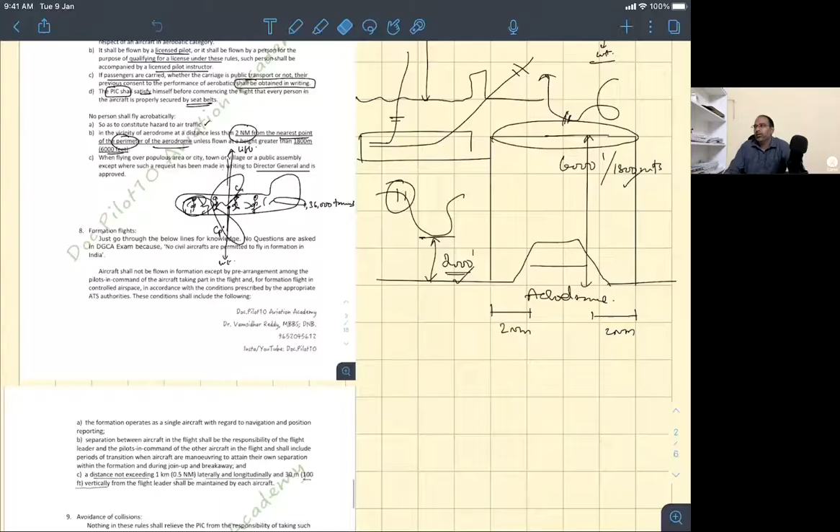So yesterday we have seen the rules and regulations to fly aerobatically. Today we will see the rest of the rules. Here, formation flights. What are formation flights?

Formation flights are like if you fly in US, if someone flew in US among you, you would know you can rent out aircraft, two or three friends, and fly like this, together, very close nearby, making fun of each other, talking on radio. Sometimes you see this in air shows, they do formation flights, like five or six aircraft will be doing like this.

I mean, they go together. For example, you and your friend want to go from one place to other place in US, you can do a formation flight. I have a friend who is very close to me, so he always sends me videos when they do formation flights in US.

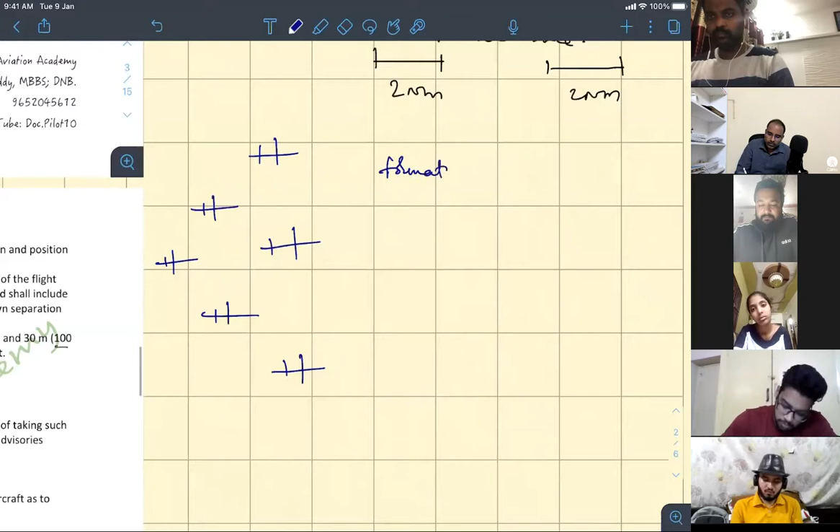Formation flights are not permitted in India. No civil or general aircraft can fly as a formation in India. Of course, military aircrafts do fly. Even though it is not permitted in India, nobody will ask you any questions because it is not permitted. In airlines, you won't have any questions on this. In DGCA, you won't have any questions on this. But it is interesting, na?

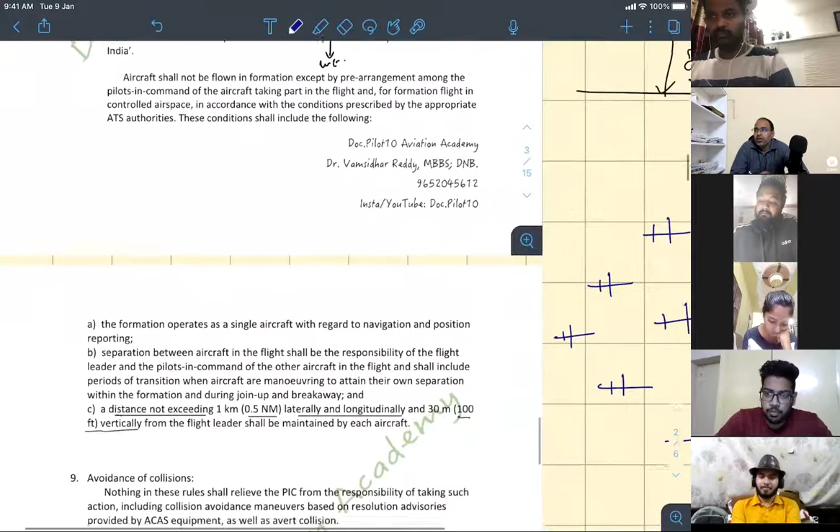If some of you are flying in US, you have to know this. If aircrafts are flying in formation, they can only do so by prior coordination. Even before they start their flight, I cannot just say on radio, shall we do a formation flight to so and so place? No, I cannot do it. Formation flights can only be done by pre-arrangement, meaning you have to talk to the other pilots before you start, and this has to be notified to the appropriate ATS authority, if you have a tower. If you're flying over large places, you should file a proper flight plan. And if you're forming a formation like this, the ATC will consider this as a single flight.

And who is the pilot in command? There are multiple pilots in command, so there will always be a leader. This will be the only guy who will talk to the ATC. They will fly as if it is one aircraft. Joining and leaving of aircrafts is all pre-planned. And who is responsible for the separation? Only the leader, of course, and he should be able to coordinate with all the pilots in command.

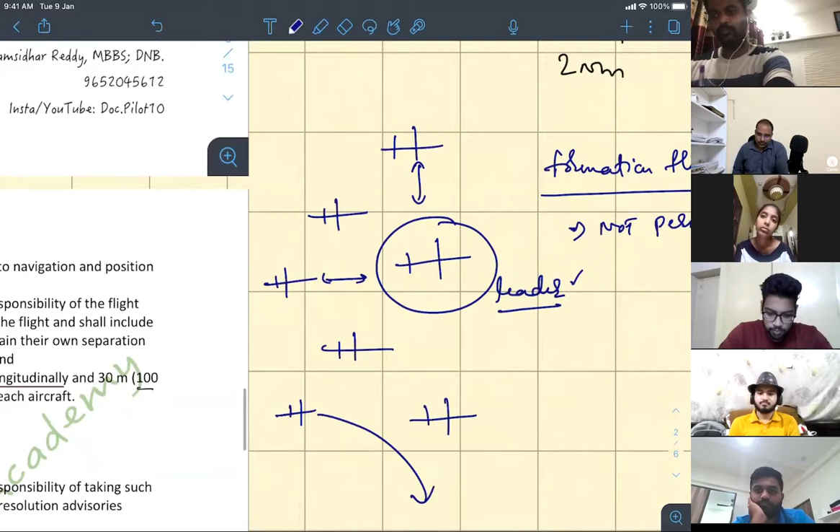How many of you have seen formation flights like this in YouTube videos? Many of you, but nobody would have seen formation flights like this unless you're flying for Air Force or Red Bull, because the distance between the two formation flights should not exceed 0.5 nautical miles, or about 1 kilometer, since ICAO gives rules in both metric units and nautical miles. So it is their rule that a formation flight should be as close as less than 0.5 nautical miles, and if flying side by side, as close as 100 feet.

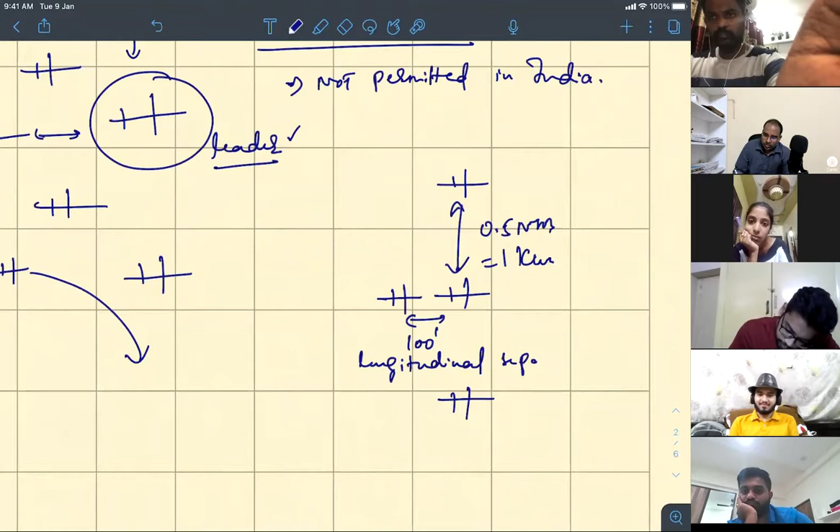This is called longitudinal separation. This is called lateral separation.

If in my life I ever visit US or Canada, I'll definitely do this. Now, for example, one guy went mad doing all this stuff. So the leader can order in the interest of safety for everyone to break up. So nothing of these rules will stop the leader when it comes to safety. Just for fun sake, nobody will ask you questions on this in exam.

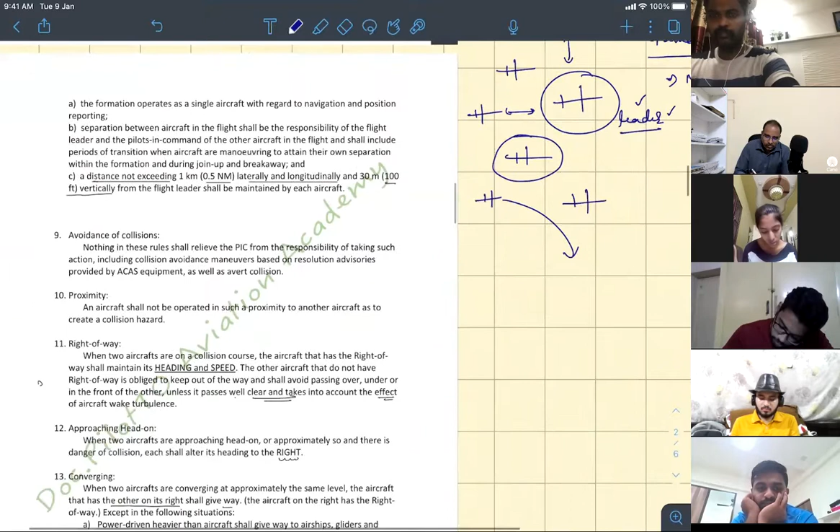For example, Amogh kept on with his career. He went and completed his CPL, then joined as an instructor in a flying club, part time. So when he is an instructor in a flying club, I go to Amog and ask him, I want to hire an aircraft and fly with you. He will ask me how many hours I have. I would say around 200, because by the time Amog comes out, I would have completed 300-400, but I would say 250 to be safe. And Amog would say, you know how many hours I have? 1,000 hours, now he is working as an instructor. Now he will increase his hours. And one or two times I would have told Amog in class what he did, so he kept that in mind.

And for example, in a sector I'm flying like this, and Amogh is here.

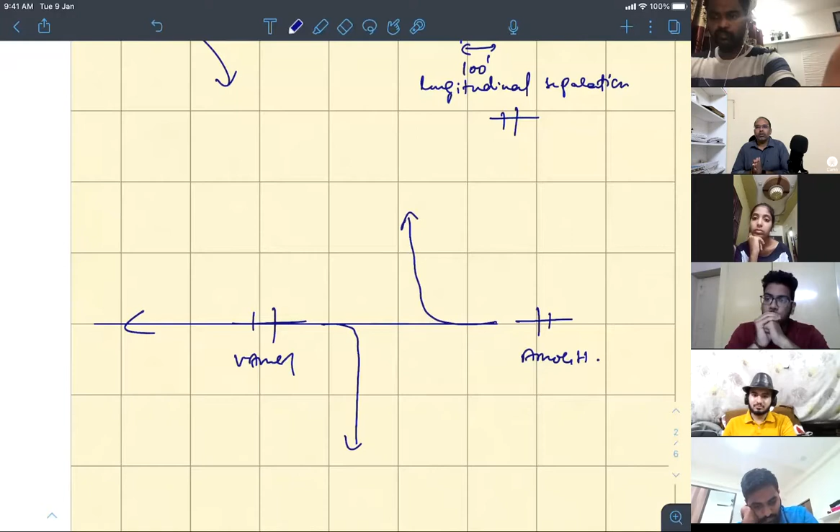I'm just saying, in cases where two aircraft are head on in a collision course, what is the best thing to do? Sir, I would turn right. Correct. Both aircraft should turn to their right. Always remember, immediately turn right when you are on a collision course with another aircraft head on. This is how you avoid collision when coming head on to each other. Both aircraft will turn right.

This is called getting close to each other, or cases of proximity. In cases of proximity, you turn right.

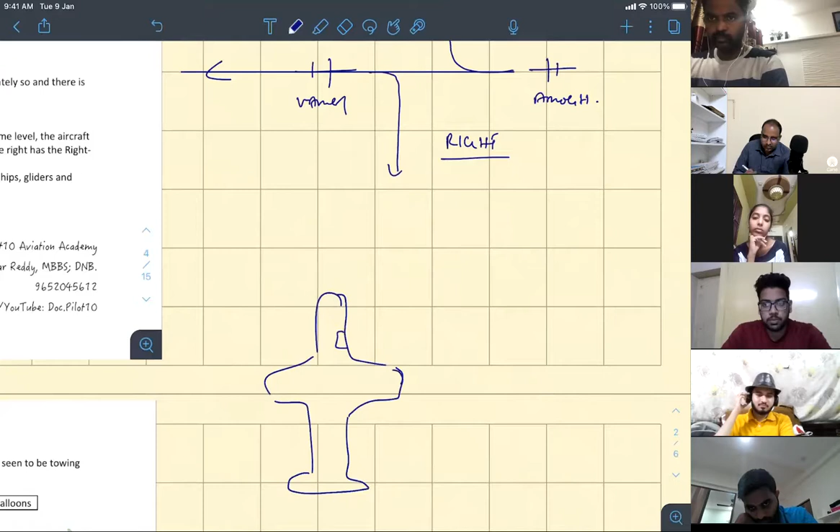If you're flying a small aircraft, or imagine you're sitting in an airliner with a seat on the right side of the plane. Now you see an aircraft, it looks very small and far away. You think, this aircraft is at a relative bearing of around 65 degrees from my nose. Relative bearing is measured from the nose in a clockwise direction, since you came for navigation. So you keep thinking, when I'm on an aircraft, I also keep thinking this.

After 5 minutes, it's still on the 65 bearing, but it started looking bigger. After some more time, still on 65 bearing, but bigger again. So when this happens, the bearing of the aircraft does not change, but it slowly starts getting bigger. That means at some point the tracks are going to cross each other. Am I clear? You are on a collision course.

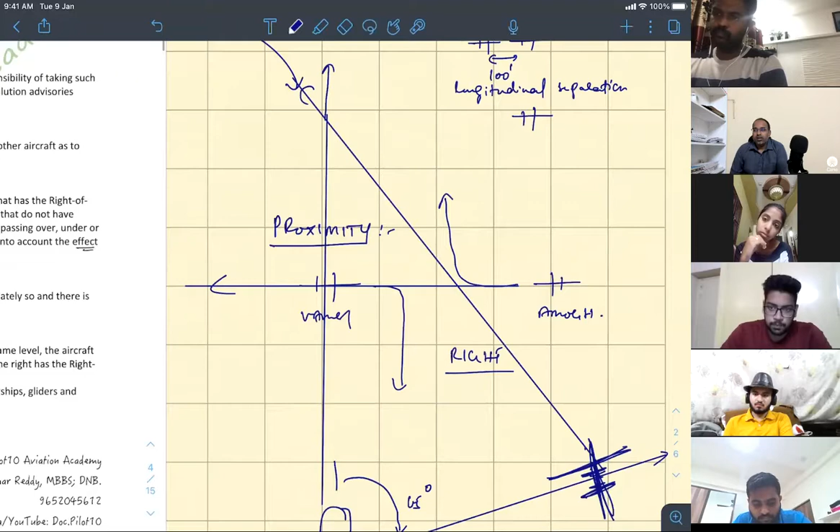In this case, how can you manage? Ideas please. Slow down the speed. There is something called right of way. Whichever aircraft is on the right, correct? Which aircraft is on the right? This one, correct? This one will have the right of way, correct?

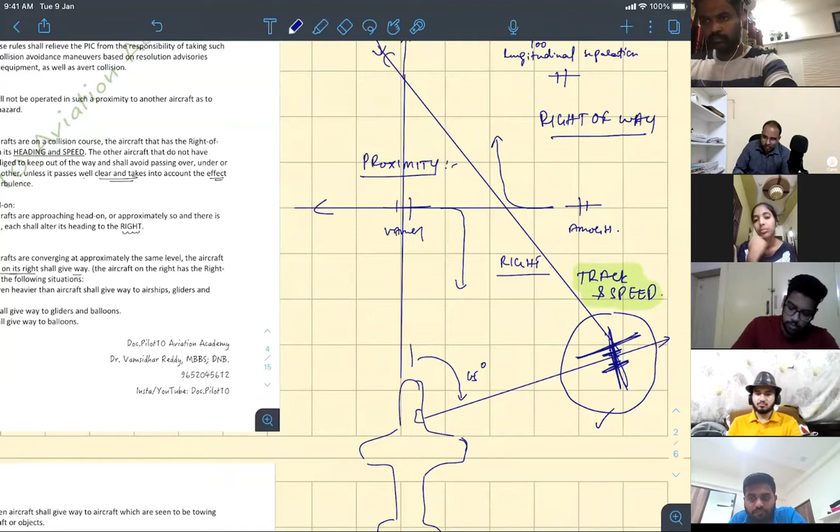It will maintain its track, it will maintain its speed. They will ask, what will it maintain? It will maintain its track and speed, it can go normal. The other aircraft, which doesn't have the right of way, on the left side in this collision course, will do anything - it will slow down, change levels, turn right like this. It will do anything to avoid the collision. This is called the right of way.

Am I clear? I'll read it out: when two aircraft are on a collision course, the aircraft that has the right of way shall maintain its heading and speed, very clear - it will maintain its track, the heading and speed. The other aircraft that do not have the right of way shall keep out of the way and shall avoid passing very close to the aircraft.

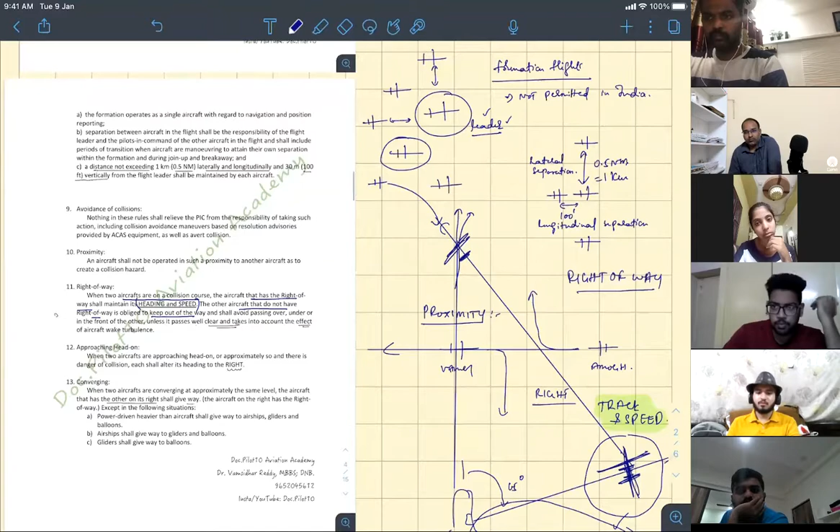If this aircraft is here, and I just say I'll overfly it, it will be a very scary situation. I don't know what your aircraft altimeter settings are, I don't know your aircraft capabilities, how accurate can you fly? First of all, I don't trust the other pilot. So you cannot go very close, over, under, or in front. You should maintain a well clear distance, and you should also consider the effect of wake turbulence.

You cannot say, 'I will go fast, I'll be here by the time he reaches here,' because there is wake turbulence - you have created vortices in your path, that also should be considered. Am I clear? Now, which aircraft has the right of way?

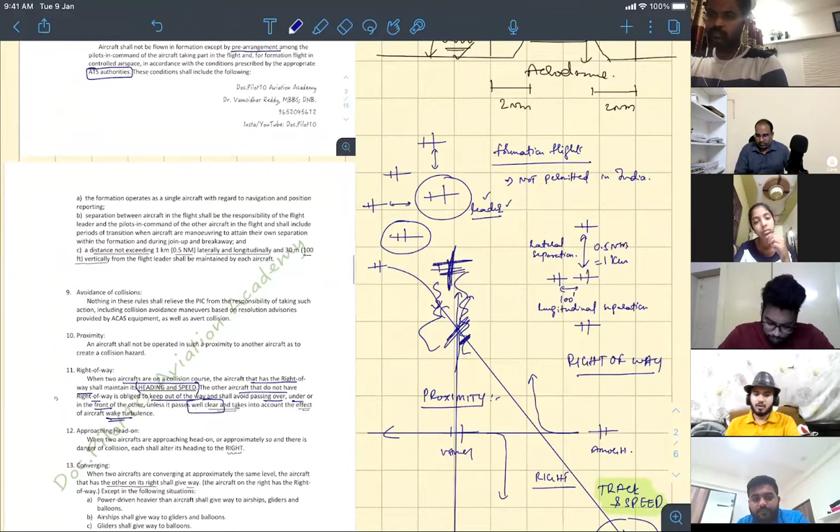The aircraft on the right side has the right of way. This is the right side, aircraft on the right. Am I clear? Darwin and Azhar, are you following? Yes, that's fine. Next.

Here, when approaching head on, you will turn to the right. Both aircraft will alter to the right. Is that understood? Yes.

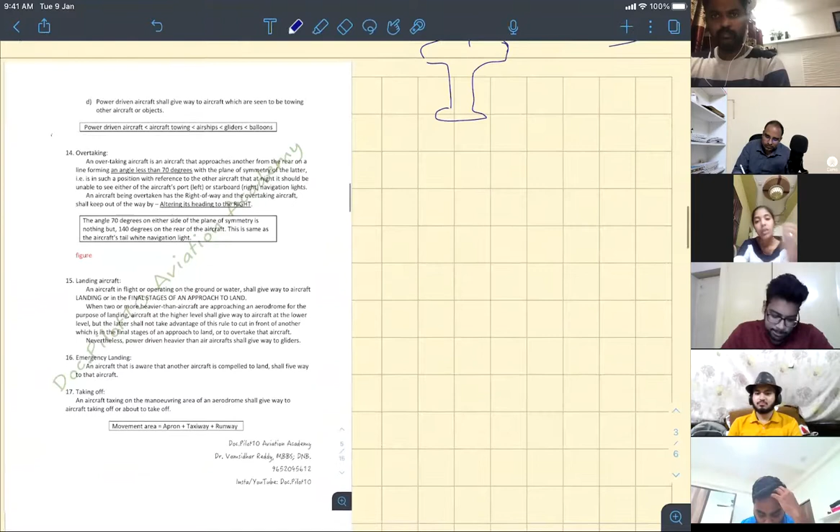For example, think you are the same aircraft. Let's say, who is flying? Manthan is flying. Okay, now I am flying this aircraft, Vamshi is flying this one. But today I am flying a glider.

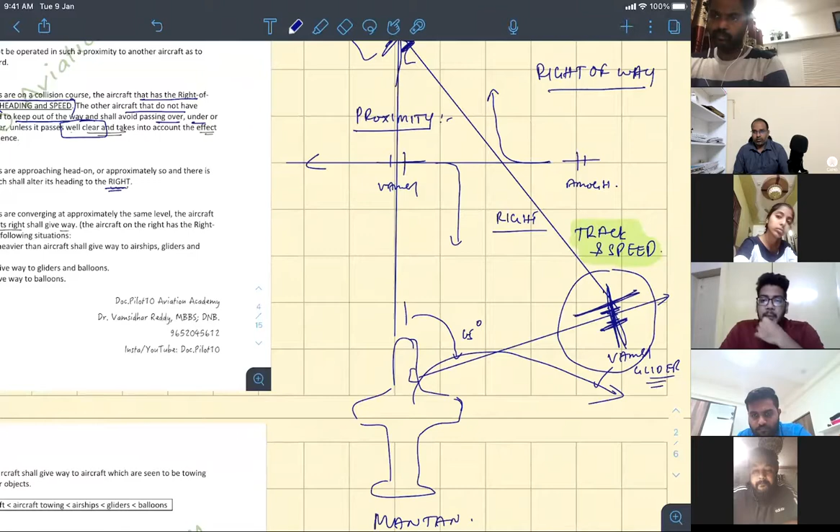Now, because the glider is on the right, it will maintain its heading and speed. Correct, Manthan will go away. Clear? Because whichever aircraft is on the right will have right of way.

Now imagine the next scenario, Vamshi is flying a glider. I am on the left, and Manthan is flying a powered aircraft, heavier than aircraft. Heavier than aircraft in the sense it has an engine and it will produce thrust. Due to the lift and thrust, the aircraft is flying. Correct. So this is Manthan.

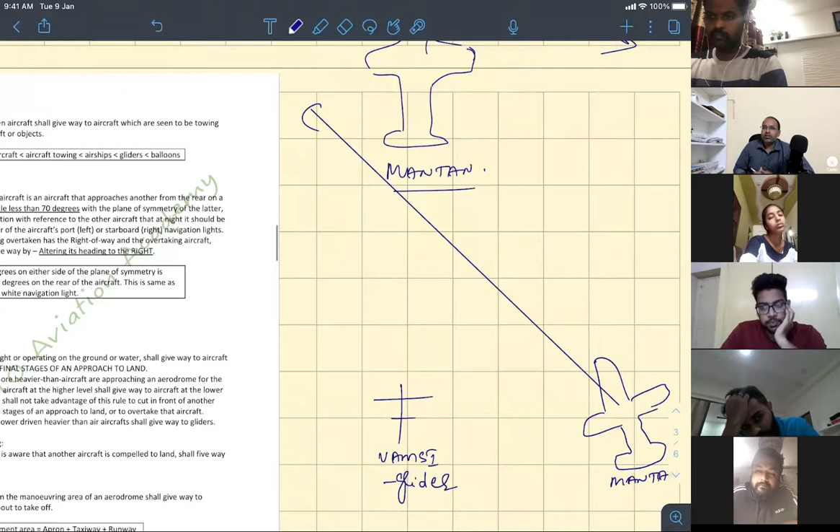Now, if Manthan says, 'Here, Vamshi, see, I have the right of way. You do whatever you want to, but I will not move.' Will I be comfortable? Yeah, I am flying a glider, I don't have an engine. See, I am maybe going to land here, or maybe my airfield is here. So if I make unnecessary turns, I may not reach the airfield. I may crash into a nearby field or building, because I don't have an engine, I cannot produce lift.

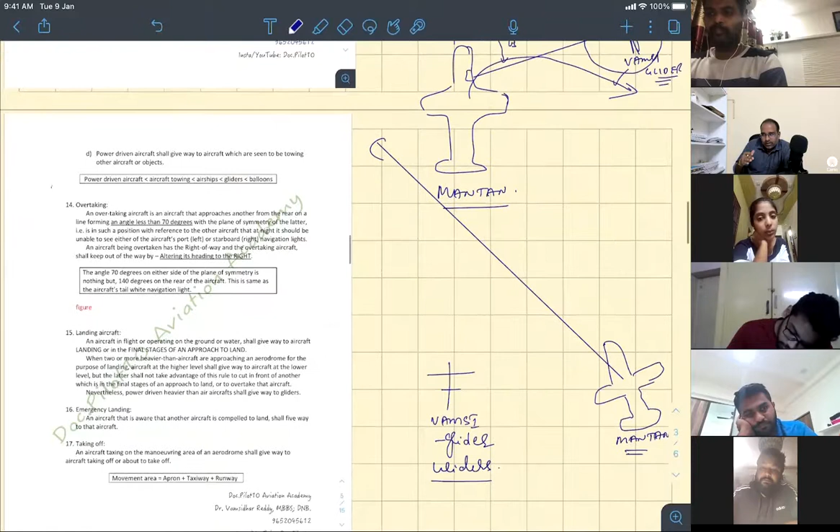So in this case, even if you are on the right and you have the right of way, you have to give way to gliders. Am I clear? That means if an aircraft has capabilities less than you, you have to give its way. Capabilities less than you does not mean a Cessna and a 737, I'm saying a glider and an aircraft.

The hierarchy is like this: power driven aircraft, in all cases, without minding the right of way, will give way to an aircraft which is towing. Is towing permitted in India? No. A towing aircraft still has engines, so it will give way to airships. What is an airship? It will be a big thing with a small fan, filled with helium, so it has some capability to generate lift and move forward.

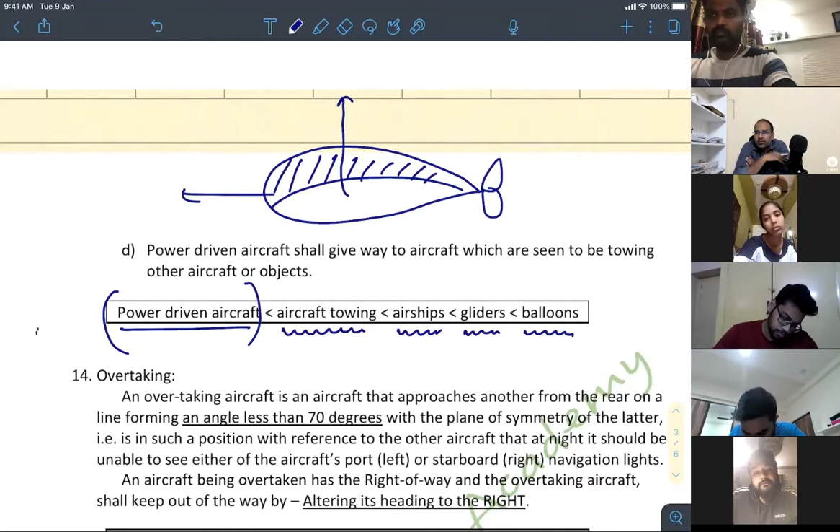Next, it will give way to gliders. Gliders will give way to balloons. Balloons are the least mobile things, it is difficult to move a balloon. So this is the hierarchy: power driven aircraft gives way to aircraft towing, this towing aircraft gives way to airships, airships give way to gliders, gliders give way to balloons. That means power driven aircraft will give way to everyone - all the towing aircraft, airships, gliders, balloons, etc. Am I making sense, Darwin? Clear everything? Yes sir, clear.

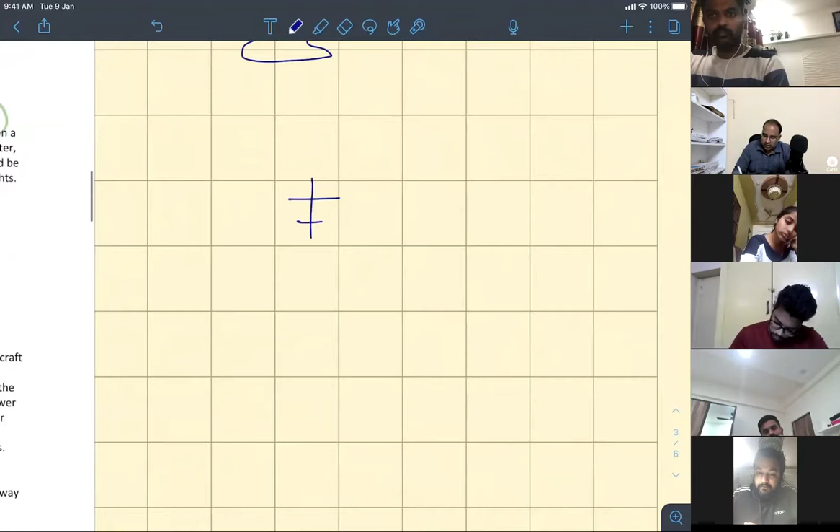See, if I am here, around at 20 nautical miles, this is Vamshi, let's say this is Amogh. Amogh is flying like this and said, 'Hey Dr. Vamshi, take a look on your right.' What is it? 'Oh, I'm overtaking you.' This is not overtaking, Amogh. This is not overtaking, that is cheating. Understood?

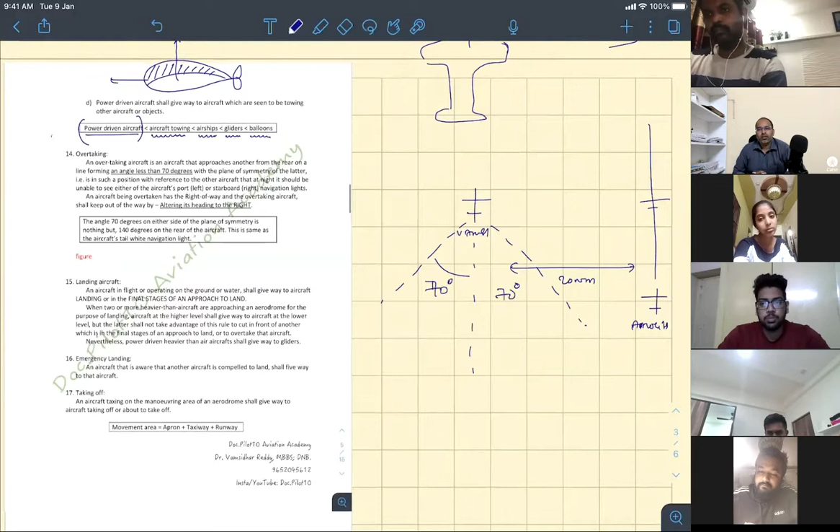Are you clear? Overtaking has a definition. Okay, then I will teach you on the radio. Amogh, by definition, overtaking means you have to be behind me within 70 degrees on each side. Clear? Am I clear? This is by definition overtaking.

Okay, then next day Amogh will come again. 'Oh, Dr. Vamshi, I am on your tail, I am overtaking you.' Okay, I will file an incident report on you, Amogh, if you do that. You know why? The aircraft which is ahead will have the right of way.

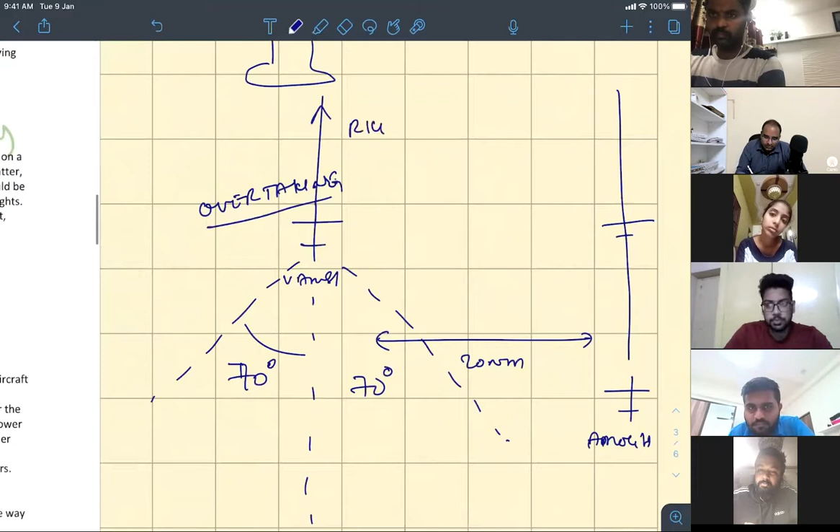The aircraft which is behind, that means 70 degrees on either side, like on the other side behind the fore-aft axis of the aircraft, it will keep out of the way of the aircraft flying ahead. At any cost, it will keep its way out. Am I clear?

See, how many of you know about lights on the aircraft? Any idea? The lights which you use to navigate are called navigation lights.

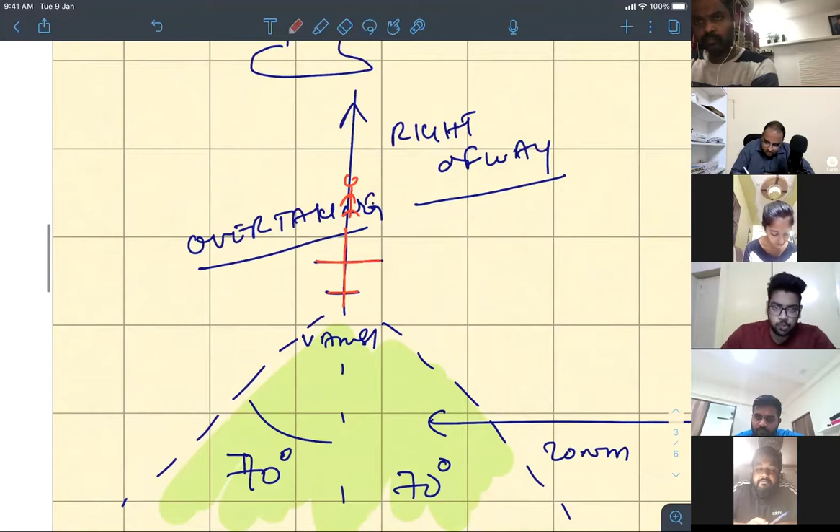So right navigation light is green. Left has how many letters? 4 letters, correct? That's why it is red. If you ever confuse, right side green or left side green, more number of letters - green has more letters, so it is on the right. Red has less letters, so it is on the left.

Clear? Now, these are steady lights. Navigation lights are always on, that means they don't blink. They are steady lights. So if they ask what is the right navigation light, it is steady green. Left navigation light is steady red.

Now, the tail light is white light. Steady white light. Am I clear? Tail light is steady white light. If you see an aircraft flying at night, you should recognize which way it is flying. Depending on which lights you see, you can tell which way it is flying.

These lights cover the entire 360 degrees around the aircraft. So white light is covering how much? 70 plus 70, so 140 degrees.

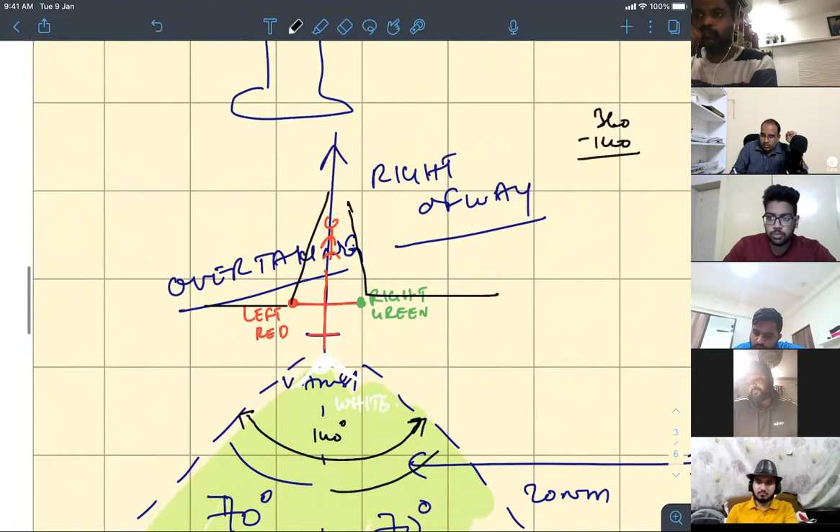The right and left, the red and green lights will cover the rest of it. How much is it? 360 minus 140 would be 220 degrees. 220, na? So this would be 110 degrees, and this would be another 110 degrees.

Yeah, Azhar, be on mute. New guys, see, whenever you want to talk, you have to press the space bar and talk. Understood? Correct.

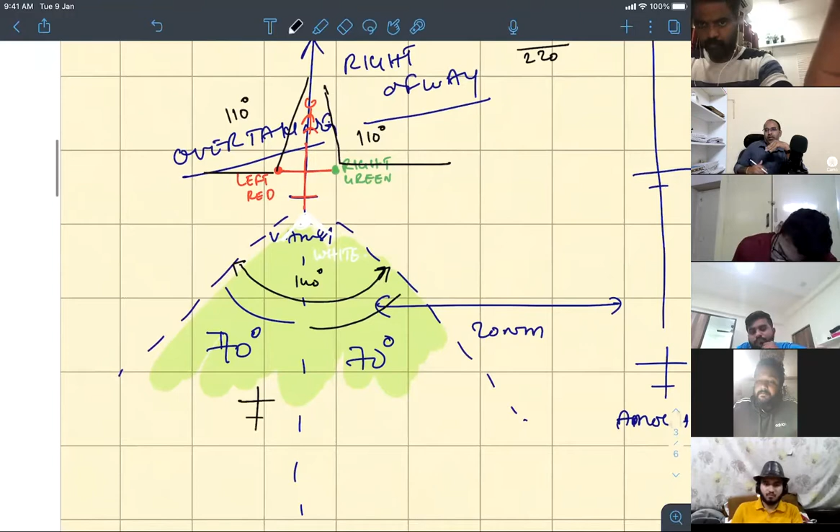Is this clear? Covering the 360 degrees. That means if you are behind an aircraft, you only see the white light. For example, if you are here, you can see the white light and also the red light. If you are here, you can see the green light, also the white light to some extent. If you are here, going like this, you can see only the red light. So the navigation lights give the relative path of the aircraft.

So if you see only white light, that means there is an aircraft ahead of you. You should not overtake it if you're flying at the same level. The aircraft ahead of you will maintain its heading and track. You should alter your heading to the right to avoid collision. You should not overtake or undertake closely; you should take all this into account.

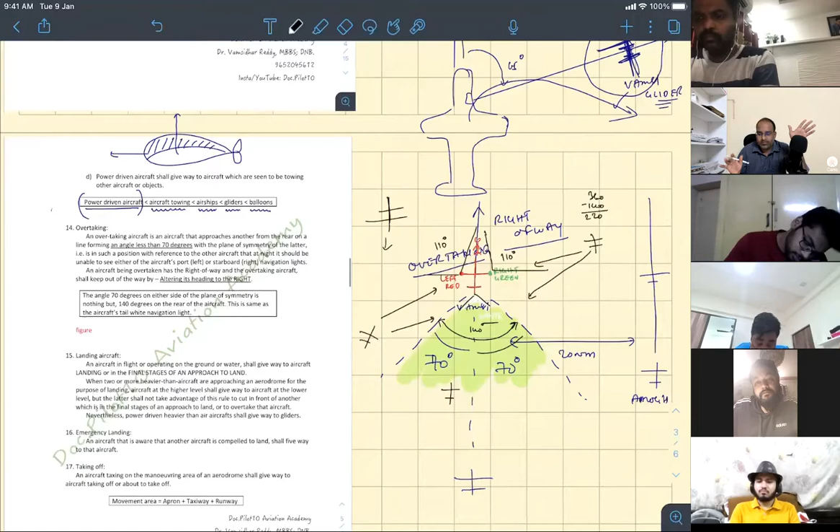Overtaking means an aircraft that approaches another aircraft from the rear on a line forming an angle of less than 70 degrees with the plane of symmetry of the aircraft, that means the fore-aft axis. Plane of symmetry is like dividing the aircraft into two parts, correct? That is the longitudinal axis.

Here, the aircraft being overtaken has the right of way. If you overtake, come down, we'll see - I'll file a complaint. Understood? Never do it.

The overtaking aircraft shall keep out of the way by altering its heading to the right. So in any case, if something is coming to collide, or if there is an obstacle, always turn right. Am I clear?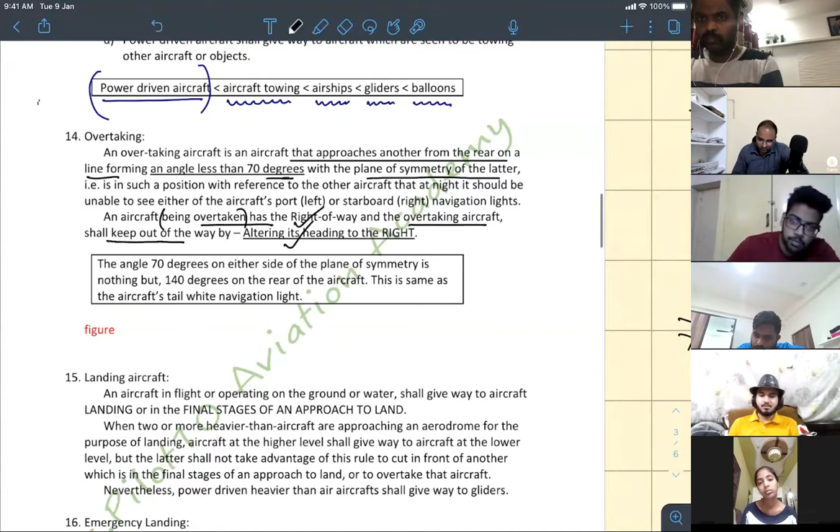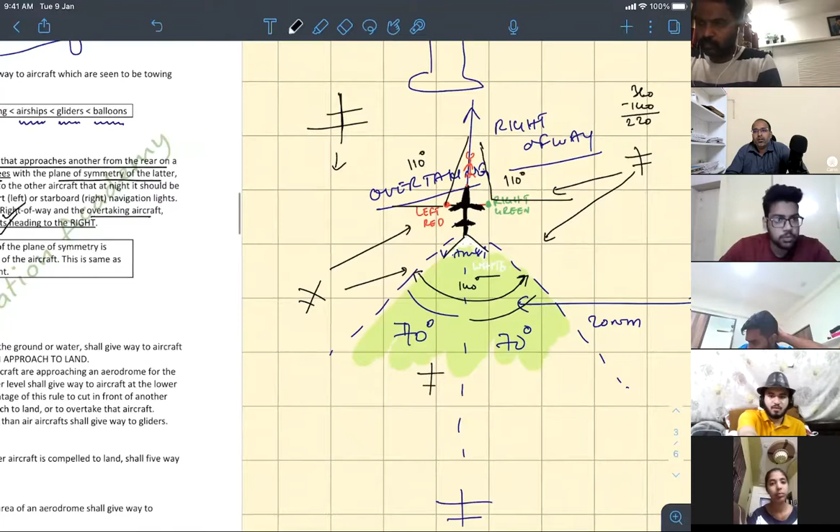Here in this figure, you write this figure, you draw this figure. Let me draw the aircraft a bit thick. Is this clear? Super clear, everyone? No.

Sir, when there is an aircraft to the right side, at a relative bearing of 90 degrees, the right of way is with that aircraft, right? Do I have to do anything to avoid collision with that aircraft? I can even descend, ascend, or turn anywhere, right? How are you on collision course if this is Amogh?

Yeah, this is the aircraft, this dot. Which heading is it flying? This is relative bearing 90 degrees, as you said. Which heading is it flying? Give me the heading. Around let's say 12 o'clock, flying parallel, no? But I won't be knowing, right? If in case it is slightly tilted toward the left, at some point it might join - see, if it is slightly tilted like this, it will remain on your 90 degrees relative bearing. One second, you became mute. I'll come back.

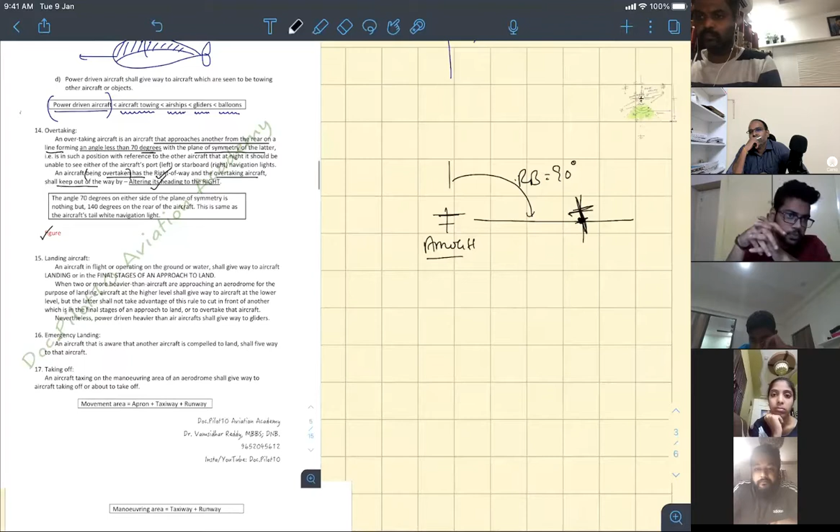See, if this aircraft is on a relative bearing of 90, and let's say its course is 350 degrees, and you're maintaining north, 0 degrees.

This aircraft initially will look small to you. You may not notice, but as you come here, it would also have come here. That means both are maintaining almost the same speed, but it will look bigger. And here, if you're here, it is closer and will look bigger. Still, it is on your relative bearing of 90 degrees.

Understood? So that means if the speed and the tracks are matching so that you are on a collision course, the relative bearing will not change, but the aircraft starts becoming bigger. This is what I was trying to explain.

So then what action should we take? Here, this guy has the right of way. You being on the left, you should have the give-way course, correct? But usually, if we are in a collision with the upcoming aircraft, we have to turn right, right? But here we can't do that. No, you can do that.

I'll show you. See, you're here, this aircraft is here. Let's say between you and the aircraft the distance is 2 nautical miles. Generally, this is how the aircraft will come close, not so close. Now, see, you will start turning right. You will slow down and start turning right, or maybe you will do a circle.

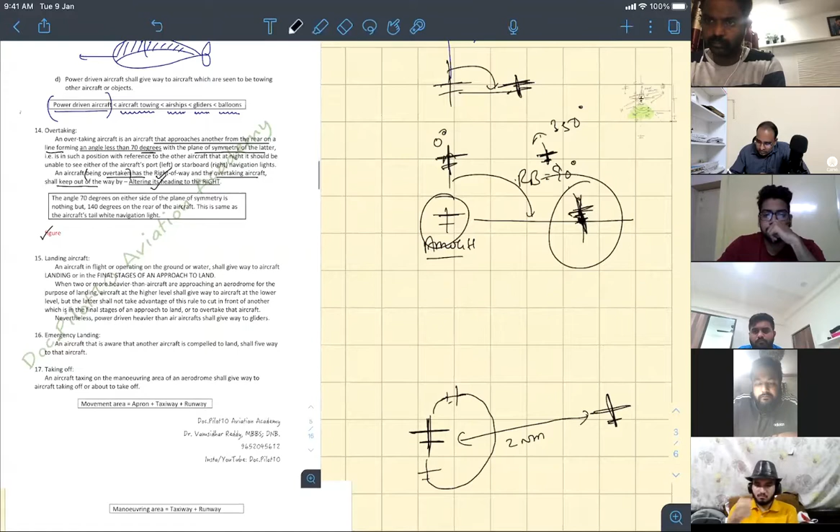The aircraft will be here. By the time you are back to your original position, correct, the aircraft will be here. You take your right.

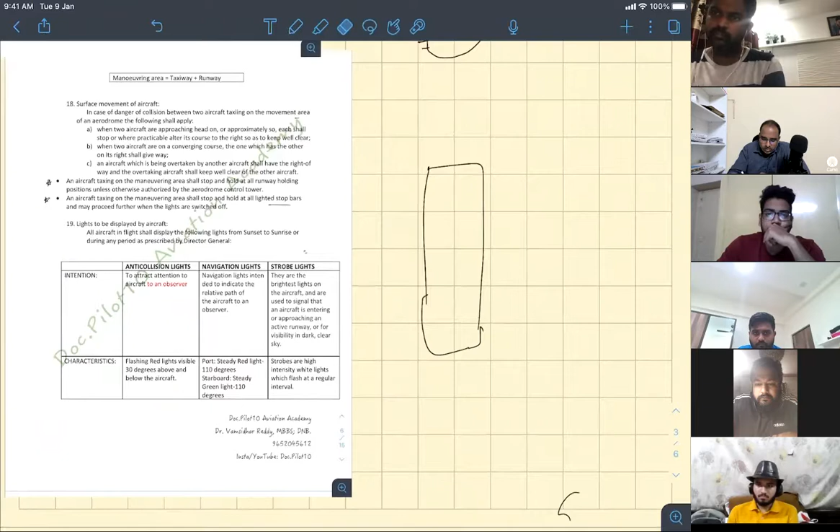For example, we do circuit patterns in flying schools. For example, if this is your runway, circuit patterns means you take off. All circuit patterns are towards left unless otherwise mentioned. You fly upwind, crosswind, downwind, base leg, finals, and complete the landing.

So for example, you're flying like this and one more aircraft is closer to you. It is also in the circuit pattern. Here in circuit pattern, at least 8 aircraft can fly, if all the people are very much experienced.

Now, imagine the aircraft ahead of you is a Tecnam. Now it will put its flaps down at this position. Initial flaps will be down. Generally here, final flaps will be down.

Now it is cruising at, let's say, 75 knots. Now being a Cessna here, you are cruising, you did not put your flaps down, you are cruising at 85 knots. That means you are closing on this aircraft, correct? So you will say, for example, if this is Hyderabad Tower, Victor Tango Alpha Bravo Charlie, doing a circle to avoid traffic, correct? You will do a right side circle. So by the time you do your circle, this Tecnam will be here and the gap is maintained.

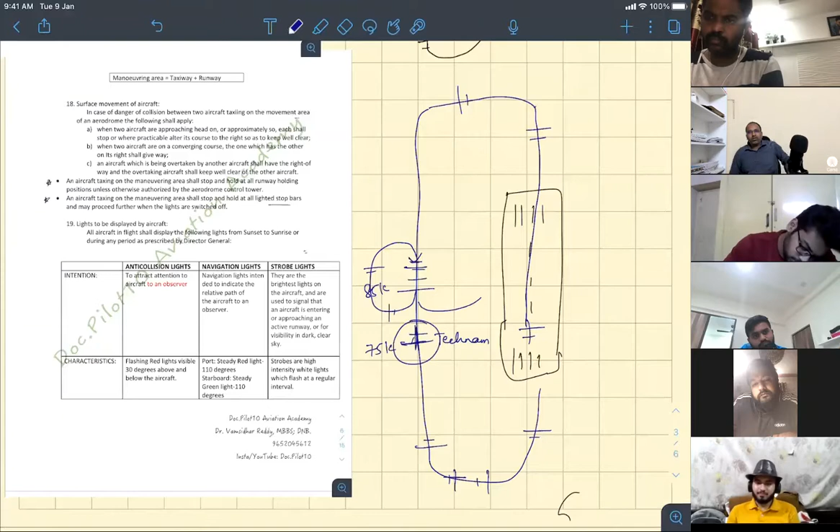All turns should be to the left, sorry, to do a left turn. In cases of collision, everything should be to the right, because that is the general rule and everybody will be following it.

Correct? For example, you and me are on a collision course. So I by default will turn right. If you turn to your left, that means here, Amogh, I will kill you. Don't turn. Turn to your right and get away. Clear? Am I clear? Is this doubt clear, everyone?

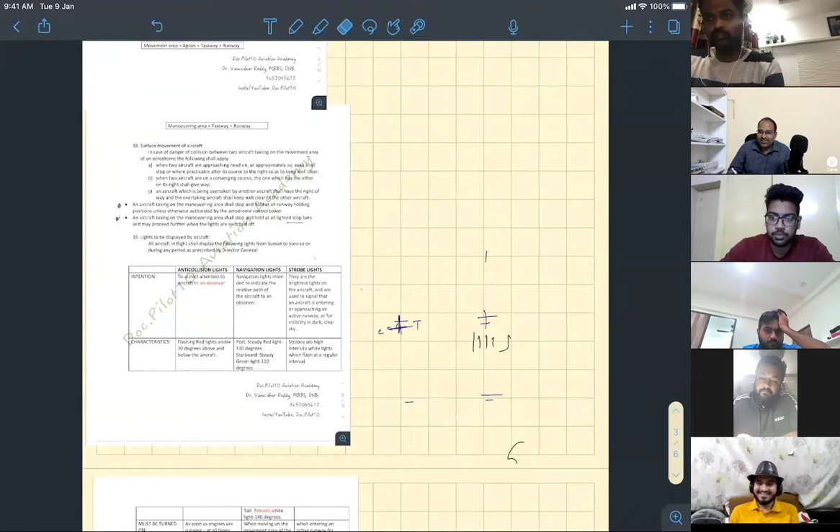Anyway, you will need a clear understanding of this because these rules are there forever, so someday it might come to application in real life. Daily it should come to application, since you will be flying in a traffic pattern in your flying schools.

That is why I'm a bit slow on this chapter. Next chapter I'll be fast.

See, for example, this is your runway. If an aircraft is coming to land on this runway, now for example, this is on finals, that means its flaps are out. Landing flaps, landing gear is out, landing lights on, so it is configured to land.

Its power is almost idle. If it's a Cessna, it is already idle, just gliding. If it's a Tecnam, almost idle, but we still keep some power, so generally for Tecnam it is the procedure. As soon as you come very close, you cut the power, not at a height. For Cessna, I think you cut the power at, let's say, 100, 200 feet. Azhar, correct? Yes, sir.

Now, for example, one aircraft is holding short. Let's say this is Ramakant.

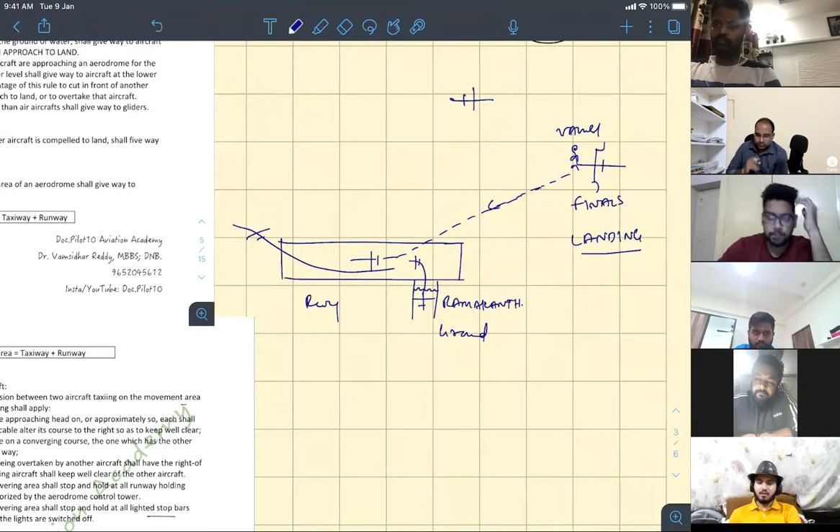See, there are two aircrafts. One Vamshi is flying, another aircraft Lucky is flying. Both are in landing configuration, both are coming to land. Let's say I am flying a Cessna today, Lucky is flying a 737, Boeing 737. Now which one has the right of way?

Generally, which is closer to the runway will have the right of way. Now let's say Lucky and I are at same distance from the runway. But Lucky is flying a 737 and it is on a bit higher level than my level. Now should Lucky land first or should I land first?

Stupid. I will land first because I am closer to the ground, na? So the closer you are to the ground, the more danger it is. So the one which is closer to the ground will come and land. This may go for a go around, do a circuit pattern and then again come back for landing. Now a guy like Amogh, who is very intelligent, will say he is behind me but he is below me, so I will come like this and land, na?

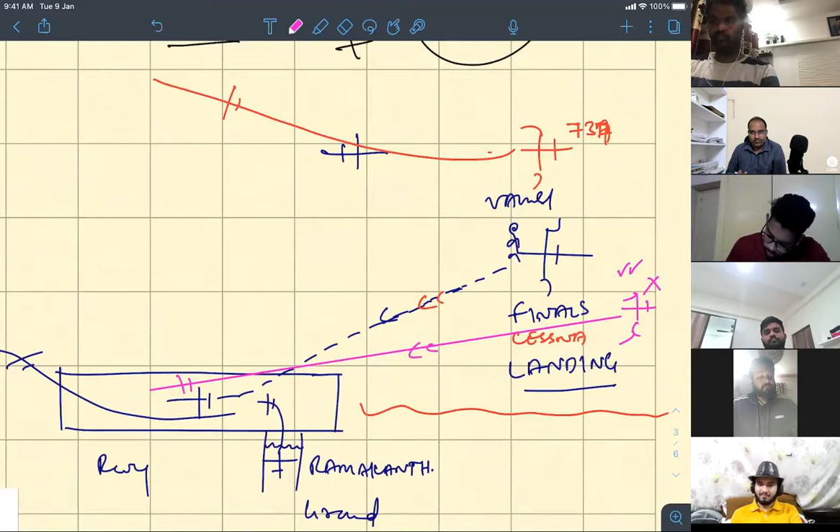So, an aircraft in flight or operating on the ground shall give way to aircraft in landing or in final stages of approach to land. Clear?

Next. When two or more heavier than air aircraft, that means normal aircrafts, not glider, not balloons, not airships, are approaching an aerodrome for the purpose of landing, the higher level aircraft shall give way to the lower level. But the lower level aircraft, like Amogh, will not take the advantage of this rule to cut in front of the other which is in the final stages of approach to land. You should not overtake my aircraft, Amogh.

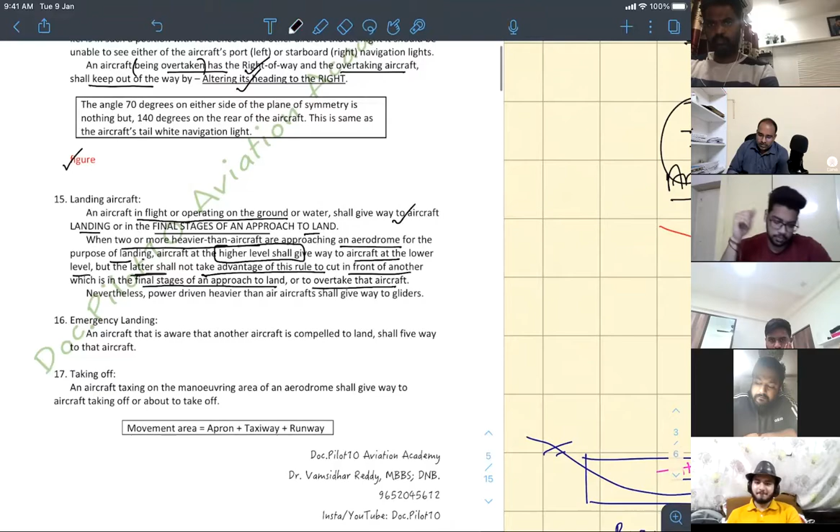Am I clear? For example, one more rule. If let's say Lucky is flying a glider today, I am flying a Cessna. I can always divert, go around, I have power, correct? But Lucky, she's coming closer to ground, she will not have more power to climb up. So I should definitely give my way to gliders, even though it is at a higher level.

Does it make sense? So the same hierarchy, power driven aircraft, towing, airships, gliders, balloons will apply here also in cases of landing also.

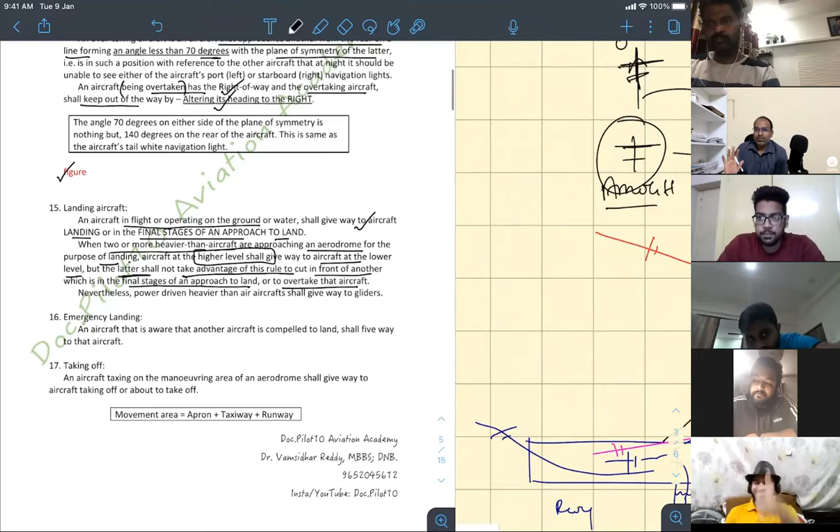Oh, now see, you are taking the advantage, you are undercutting my this thing, na? One will say notes and one will say slides. I'll give both, okay fine. I'm okay. But don't do in real life, don't do while flying. Sure, sir.

Now, for example, an aircraft declared Mayday. Even if you are just touching down, open full power, don't occupy the runway, just glide over the runway. Once your speed reaches, for example, you're flying a Cessna 70 knots or 60 knots, put your flaps up, nose up, climb off. So always give way to the aircraft which has declared a Mayday or which is in an urgent situation. Am I clear? Okay, next.

Same scenario. This is the runway, this is the taxiway. I am here, I want to take off in this direction. The winds are favoring this direction.

I am flying a Cessna 152. This is Ramakanth's aircraft, Ramakanth is flying a private jet. Here, this is so powerful that it will just need this part of runway and it can take off. Private jets are very powerful, correct? Jet engines, only 10 passengers they carry.

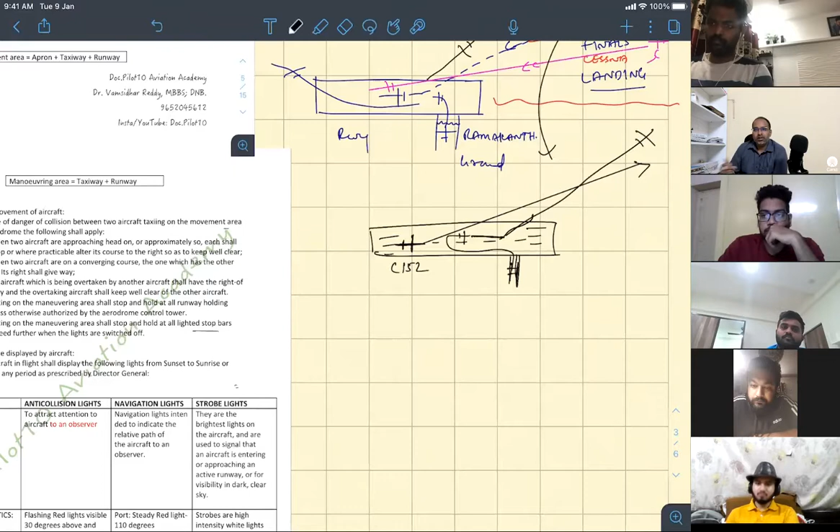Payload is less, correct. Now, once I started rolling, even though Ramakanth is comfortable doing this before time, if I reach here for my takeoff, can Ramakanth do it? No, correct. So always an aircraft which is taxiing or holding short of a runway will give way to the aircraft which is taking off. Am I clear? So never do it.

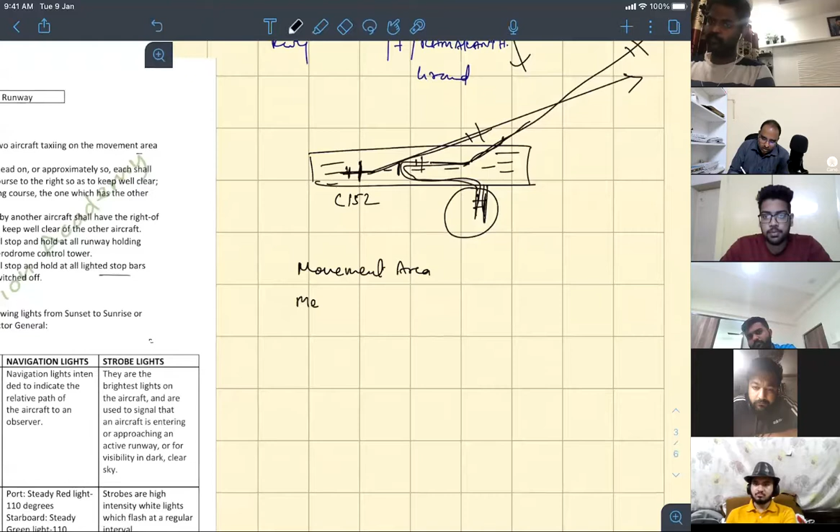Here, what is the difference between Ramakanth... you don't answer. Movement area, maneuvering area. Spelling might be wrong, please ignore. What is the difference between movement area and maneuvering area of an aerodrome?

Azhar, try. Sir, maneuvering area is the parking area where... let us say this is your gate, the aircrafts are parked like this, okay. So this is your taxiway. Taxiway is movement area, wait. This is your runway. The runway is maneuvering area and taxiway is movement area.

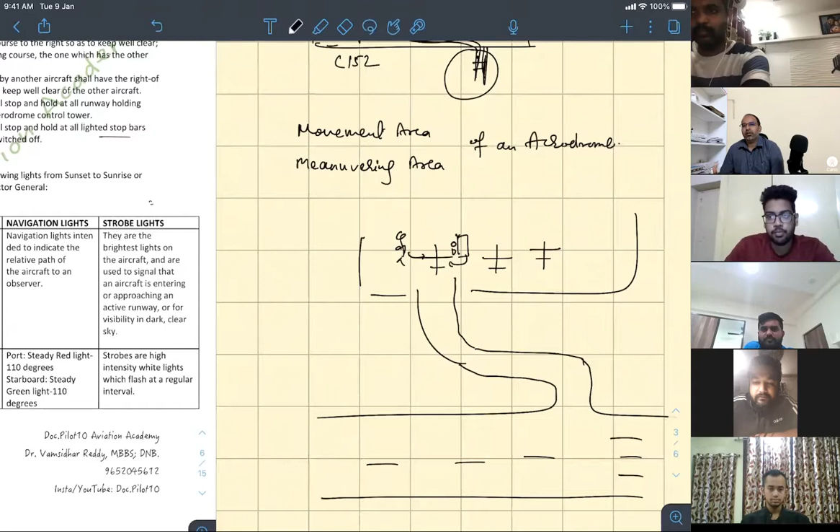English, oh. Here, see, wherever, this area is your apron, correct? Here the passengers are coming into the aircraft, people are filling the fuel. So here there is a movement, but as a pilot, you will not be maneuvering the aircraft. People move there, but you will not maneuver the aircraft. See, movement area will include

the apron, plus taxiway, plus your runway. All this is movement area, where the aircraft moves, people move, etc. But if you want to go and take off, in this apron you will not move the aircraft. They will give you a pushback until you reach your taxiway like this. From here, you will turn your engines on and then you maneuver the aircraft and then you take off.

Correct, so maneuvering area means only taxiway, that is where you maneuver the aircraft, correct, as a pilot. Only taxiway plus runway. Am I clear? Mandan, did you understand the English, okay. Educated guess, okay, fine, okay sir.

Let me... is this understood? Shall I move on to the next point?

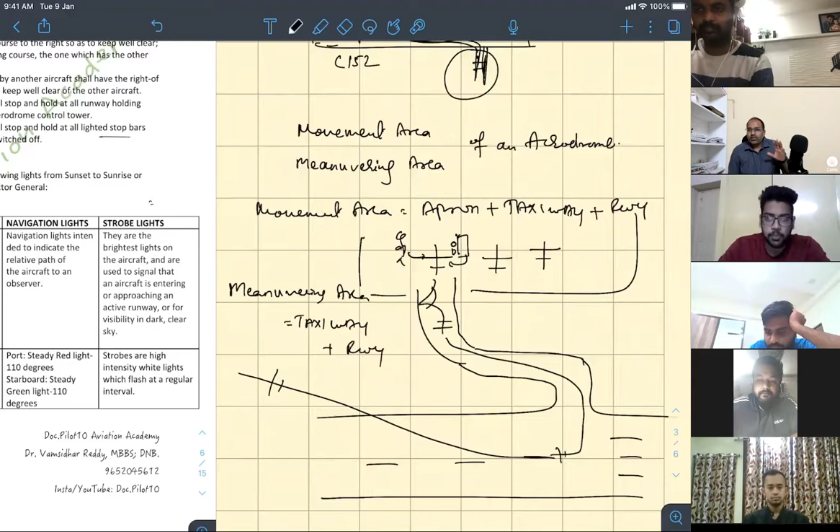Aircraft on the maneuvering area. That means, because this word came, I am teaching you this in advance. Generally I teach this in navigation. So maneuvering area means an aircraft on taxiway or runway shall give way to aircraft taking off or about to take off.

Correct, now you may ask me a doubt, sir - if maneuvering area includes runway, correct, how come there are two aircrafts on a runway? Can there be two aircrafts on a runway while one aircraft is taking off? Can there be or not? Yes, sir, yes, correct.

See, generally in a flying club, what happens is, like in my flying club, the hold short was here. When we are using this runway for takeoff, maybe 3 or 4 aircrafts used to taxi together and they used to stand like this. First aircraft will come like this, second aircraft will come like this, third aircraft will come like this. Now, one will take off like this.

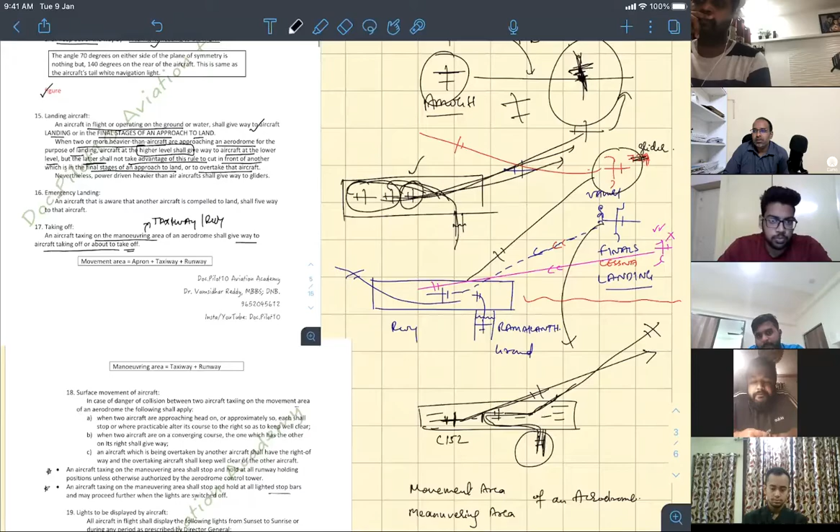After it reaches a certain level and makes its initial turn, the second will take off like this, the third will take off like this, correct? It means the two aircrafts which are behind shall give way to the first aircraft, they will not interfere with it. Am I clear? Is the 17th point very clear?

So if two aircraft are approaching head on, they can either apply brakes and stop, or if practicable, if each has a taxiway to the right, they will turn right. Same rule as in the air. If two aircraft are on a converging or collision course, the aircraft on the right, even on the ground, will have the right of way. It will maintain its way while the other stops or turns right. Am I clear?

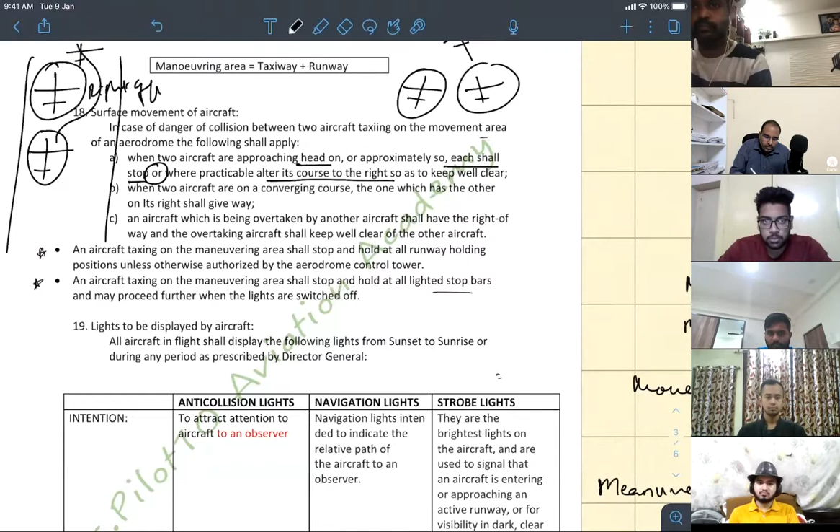If there is one big taxiway and a small aircraft, can it taxi like this to overtake? No, you cannot overtake - the aircraft ahead will have the right of way. If there is another taxiway that is very clear, you can quickly go, but you should be careful that by the time the other aircraft comes, you should not be causing any trouble. But don't do that.

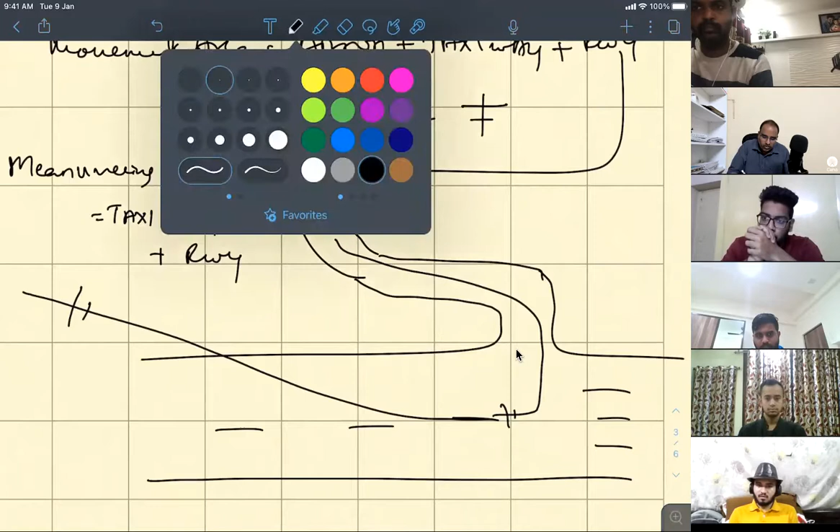Now, on taxiways close to the runways, there are points called hold short points. They will look like this. No aircraft will cross a hold short point without the tower giving them clearance. Am I clear?

When you are at the hold short point waiting for your turn to line up - coming and centering your aircraft with the runway center line is called lining up - this is how you ask for lining up clearance. For example: 'Begumpet Tower, Victor Tango Alpha Bravo Charlie, hold short runway 27, request departure.' This means you are asking for departure and he knows you are holding short here. He will reply: 'Victor Tango Alpha Bravo Charlie, cleared to enter, line up runway 27.' That means he has cleared you to enter and line up runway 27.

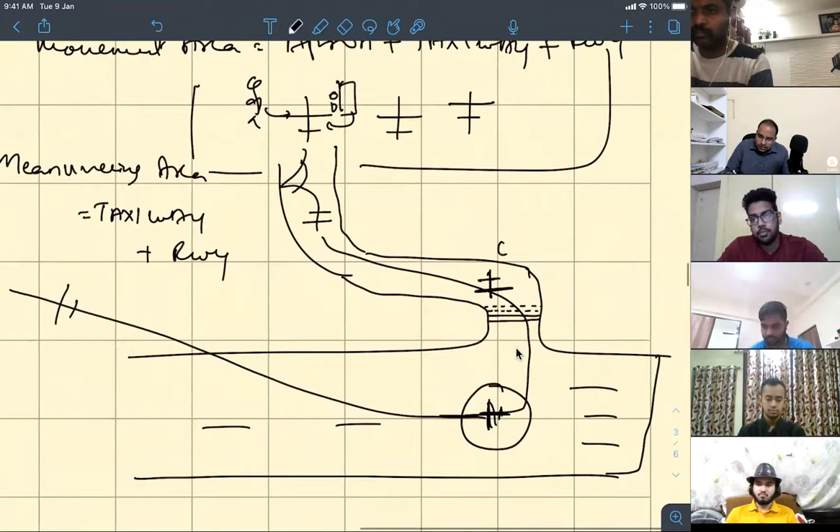If you are coming to land, you will ask permission like this: 'Victor Tango Charlie Bravo Alpha, approaching runway 27, request clearance to land.' 'Clear to land, Victor Tango Charlie Bravo Alpha.' Now see, 'cleared' is the same word used for this hold short aircraft also. If an aircraft is coming to land, the same word 'cleared' is also used.

In real life, there are some controllers who are lazy and will just say 'cleared.' So once, landing clearance was given to one aircraft - just 'clear.' At the same time, another aircraft was asking to line up on the same runway, and there was a problem in the transmission. Both pressed the transmission button at once, and the controller cleared this aircraft to land. This aircraft thought the clearance was for it, and it came and lined up on the runway. The landing aircraft landed exactly on it. Nobody survived - both aircraft, everyone died.

Because this landing aircraft was at high speed - it was a 737 coming at around 200 knots or 170 knots while landing. The other was a small aircraft, like an 8-seater. Am I clear? This has really happened.

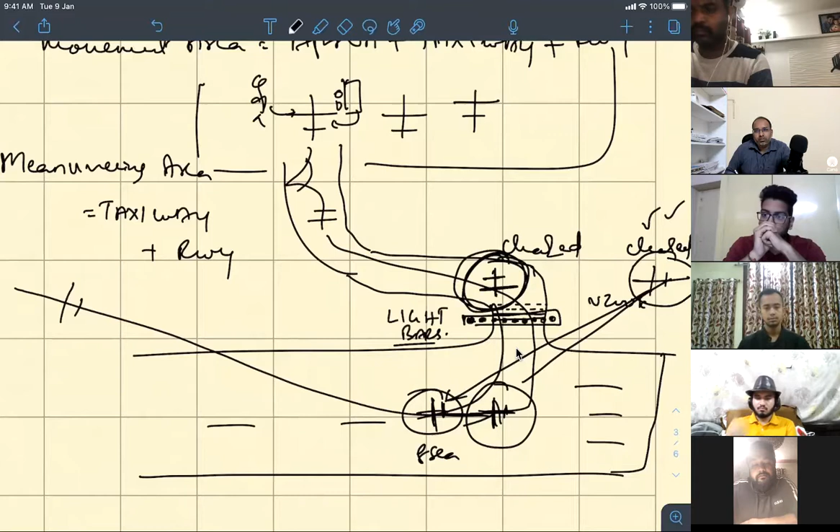When this kind of scenario happened, they thought about how to avoid it, and they made something called light bars. There will be a lighted bar, and you cannot cross this lighted bar when it is on. If you get clearance to enter the runway, the light bar will temporarily turn off, meaning the clearance is for you only, and you can go and line up.

So when light bars are on, will you enter the runway? No. That means when the light bars are on, some other aircraft is actively coming to land, and you did not get clearance. Is it not very easy to understand which aircraft got the clearance using this method? That is implemented now.

An aircraft taxiing on the maneuvering area shall stop and hold at all runway holding positions unless authorized by tower. An aircraft taxiing on the maneuvering area shall stop at all lighted stop bars and may proceed further only when the lights are switched off. Is this very clear, everyone?

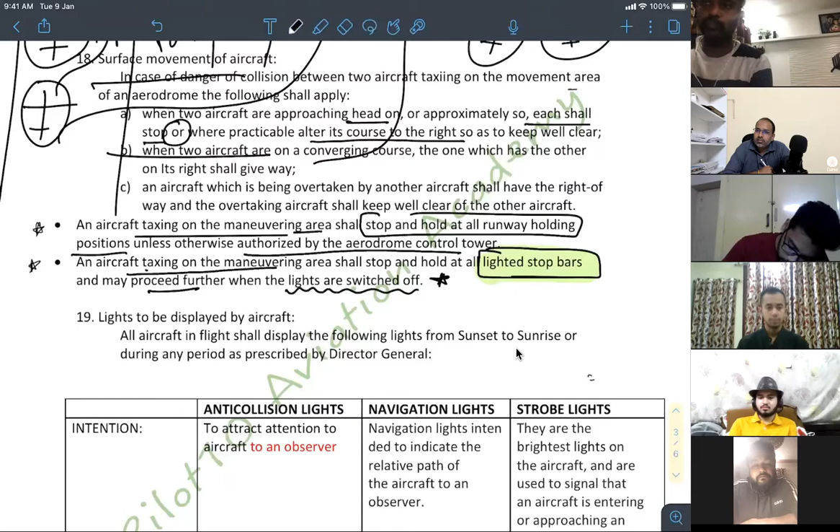Darwin, Azhar, Kaustav? Yes, sir. Ramakant, Manthan? Yes, sir.

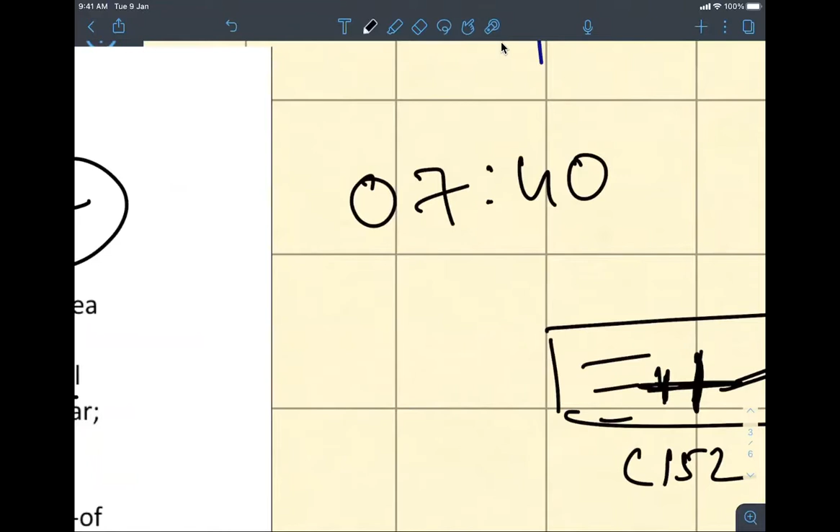How many minutes will it take to complete? 20 minutes. Do you want me to complete in 10 minutes? I can do it, 20 minutes is okay.

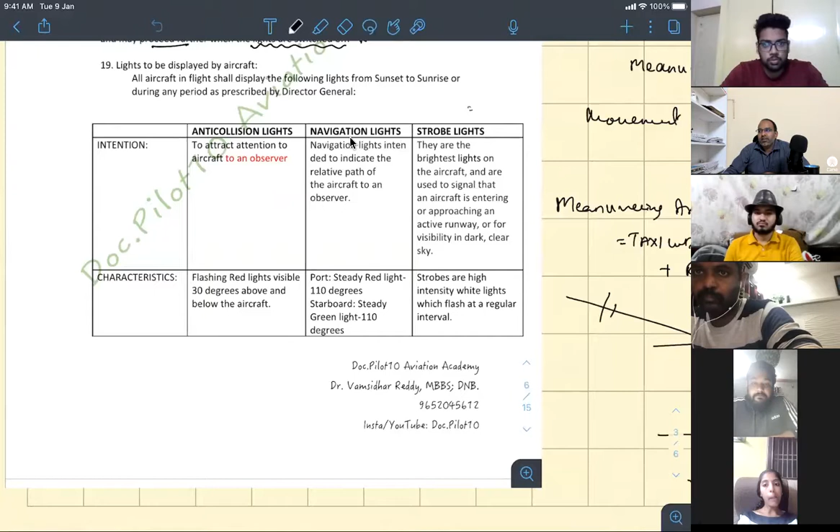Everybody on mute. Coming to the lights displayed on the aircraft, you have in your notes a very good table I made with all the information put together. There are mainly 3 types of lights: anti-collision lights, navigation lights, and strobe lights. There are other lights also, for example landing lights.

There are taxi lights also. For example, there are logo lights also to display the logo of the aircraft. So there are a few different types of lights, but these are the main lights. Every aircraft will have this.

I have already taught you about navigation lights. They intend to indicate the relative path of the aircraft to an observer. Clear? What is the intention? Next.

Red, port means left. Left means port. Right means starboard, so starboard is right. Left has less number of letters, so red. Right has more number of letters, so green.

One more thing I'll tell you. If 2 aircrafts are flying like this, let's say this is aircraft A and aircraft B. Which has the right of way? B, correct. Now if the pilot at the B aircraft looks at the A aircraft, which light will he see? Green, correct.

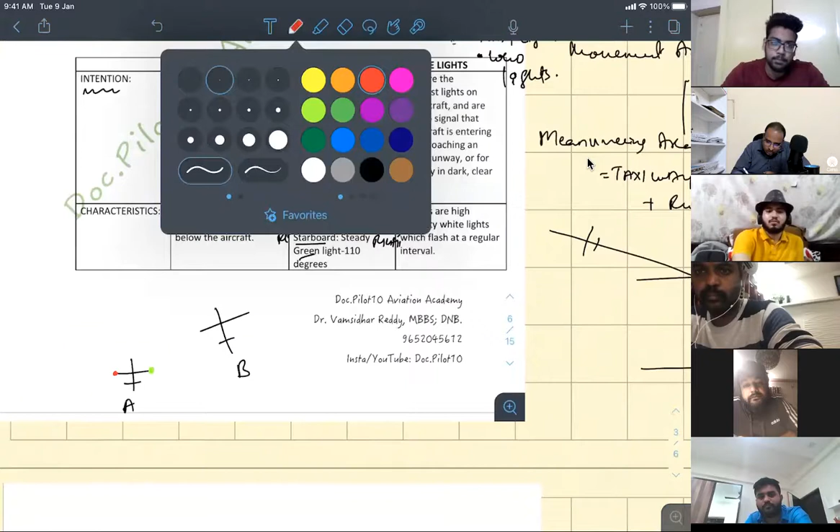If the pilot of A aircraft looks at B aircraft, which light will he see? Red and white, correct. Like red and white, but red light is what they see. So that's why, if you are seeing red light, that means you don't have the right of way.

You don't have the right of way. If you see the green light of this aircraft, that means you have the right of way. That's how they have designed it. Am I clear? Does it make sense?

Correct. Next, here, when should you turn on your navigation lights? Means when you start moving in the movement area, correct? Just before you taxi, navigation lights on, releasing brakes, and you taxi. When moving on the movement area, that is how the checklist will be for any aircraft.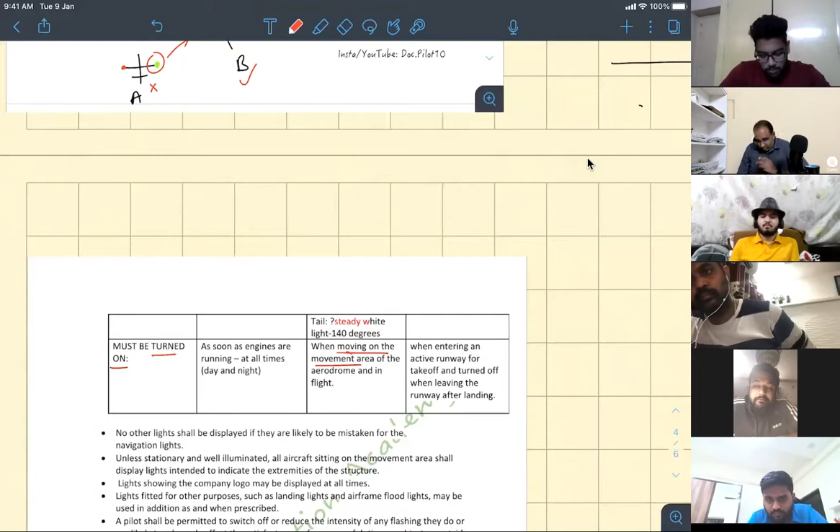You take any aircraft, Cessna or Indigo 737 or A320 or any airliner, the checklist will be with this kind of base only. Next type is anti-collision lights.

Do you see lights if this is the aircraft? Do you see this kind of lights up and down which are red in color? Maybe I should have drawn the aircraft black. There is one light up and one light down.

Now if you take from the aircraft, if this is 0 degrees, up 30 degrees and below 30 degrees. If you are in this zone, generally you can see the lights. So these are anti-collision lights. Am I clear?

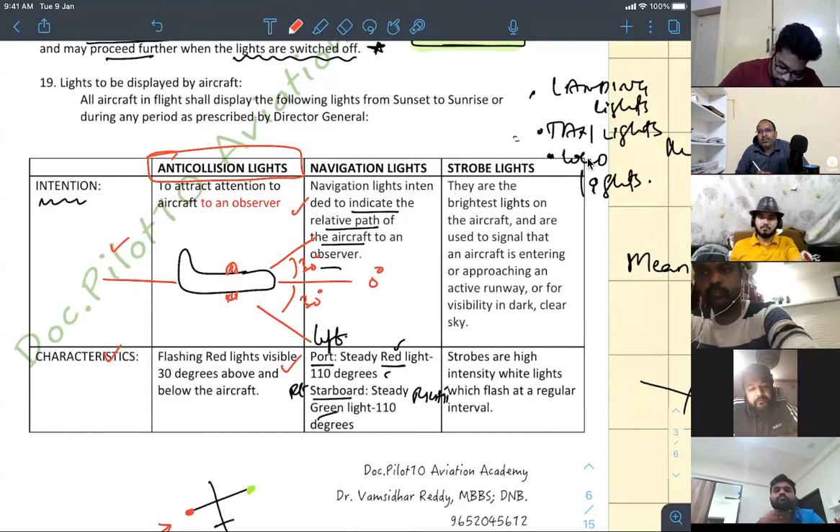Now what do they indicate? They indicate that engines are running. I am moving, don't collide with me. So even if the aircraft is on stand and ready to taxi and it turned on its engines, it is an indication to personnel nearby. Your anti-collision lights are on, that means I have started my engine.

You should not start your engine before turning on these anti-collision lights. Am I clear? So these are flashing red lights. They are flashing red lights. Visible 30 degrees above and below the aircraft.

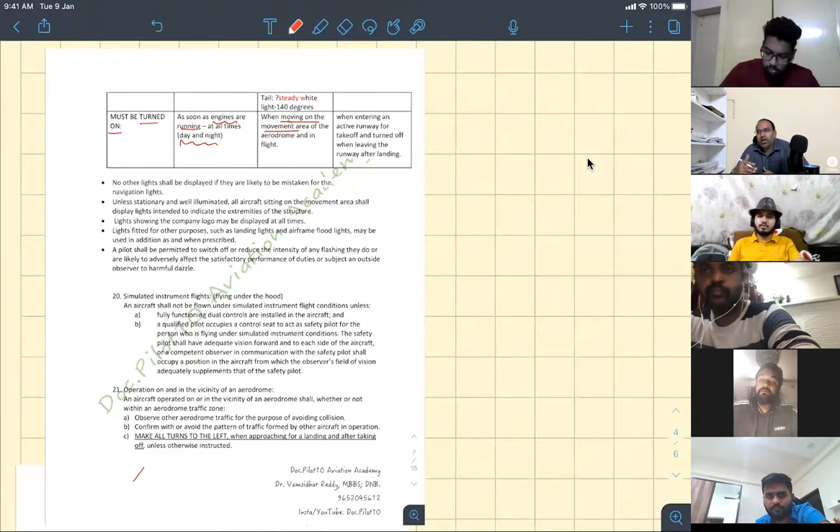If you are standing on ground, you can see you are below 30 degrees to the aircraft nose. So it is an indication that engines are running, intended to attract the attention of an observer. Must be turned on as soon as the engines are running, at all times during day and night. If your engines are running, your anti-collision light should be on. Am I clear? Are the two lights clear?

Navigation lights and anti-collision lights. Okay, the third light is strobe lights. These are the brightest lights. They consume a lot of electricity. If you turn them on for example half an hour, your battery will be dead.

Then you have to tow your aircraft to your hangar, and then recharge your battery to turn on your aircraft. Very bright, very powerful. Do you see the white flashing lights on the wings? Those are strobe lights. These are the brightest lights.

These are the brightest lights - high intensity white flashing lights. Why are they so high intense, so bright? Because if an aircraft has turned on its flashing white lights, that is strobe lights, it means it is going to enter a runway for takeoff, or it can be coming in for landing.

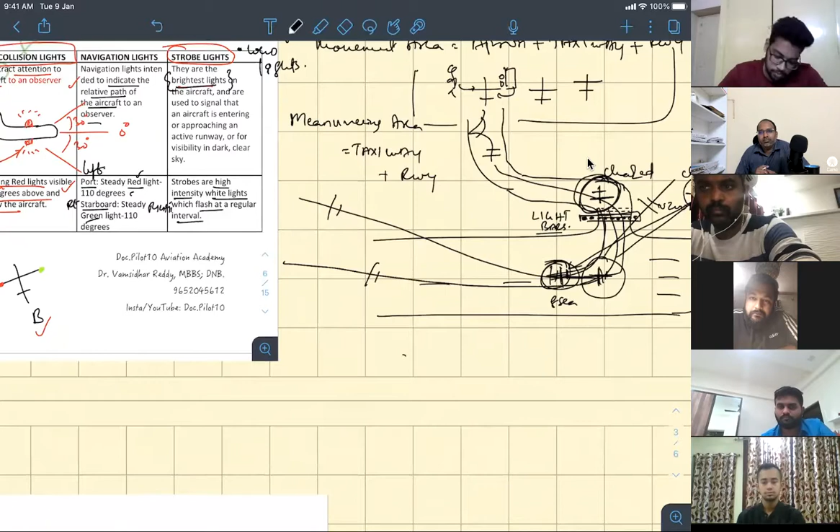So you cannot turn on strobe lights on the taxiway. It will be very disturbing to others also - it will flash into others' eyes, so bright. So you cannot turn it on. The intention is to signal that the aircraft is entering or approaching an active runway.

So when will you turn on strobe lights? When you are entering an active runway for takeoff, or when you are coming for landing, until you are leaving the runway. Once you leave the runway, you can turn off your strobe lights.

Strobe lights, how do they look? Can anyone describe strobe lights? High intensity white flashing lights. Navigation lights are steady lights - right green, left red, and tail white. Anti-collision lights are flashing red lights.

They will not show you a diagram in the exam, they will ask you the description. It is very important to understand.

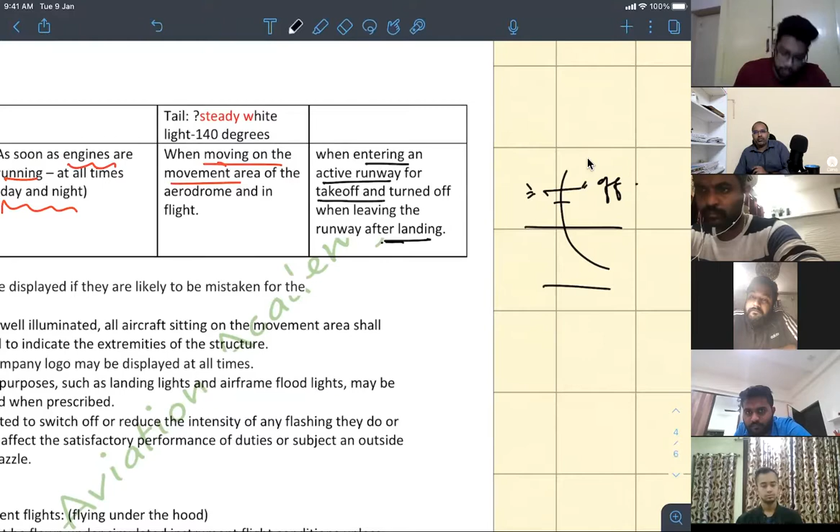When do you turn on navigation lights? When you just move, that means just before taxi, turn on navigation lights and then release brakes and taxi. At engine start, just before turning on your engine, you turn on anti-collision lights and then start the engine. Just before entering the runway, you turn on strobe lights.

Now other lights - while taxiing, for example if it is night, you will have to see the taxiway, so you turn on taxi light. If your aircraft is here, it will illuminate a lot of the way - it will illuminate your taxiway.

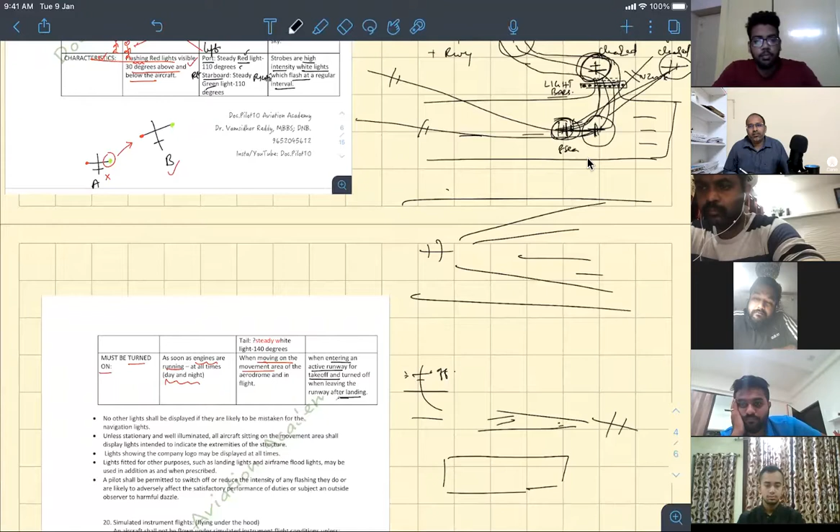Now the difference between taxi light and landing light. In some cases, both taxi and landing lights are the same for smaller aircraft. When you're coming in for landing, you are generally at some angle, not too much because you've opened your flaps which makes your nose down. But if you turn on a taxi light, it will illuminate like this - you cannot see your runway at night. So landing light will be positioned differently, so it will illuminate your runway. That is a different light, the landing light.

Now for example, you're flying airplanes with a logo - I've seen airplane logos, I like it a lot. So your logo light is here, for example let's say this is your logo. You can turn on your logo light always, but it should not be too bright - you should not disturb others.

If someone says on radio, 'you are ahead of me, I'm taxiing behind you, please turn off your logo light, it is so much flashing or it is so bright' - you should be kind enough to turn it off. That is a rule - you cannot cause a hazard by turning on your lights too bright.

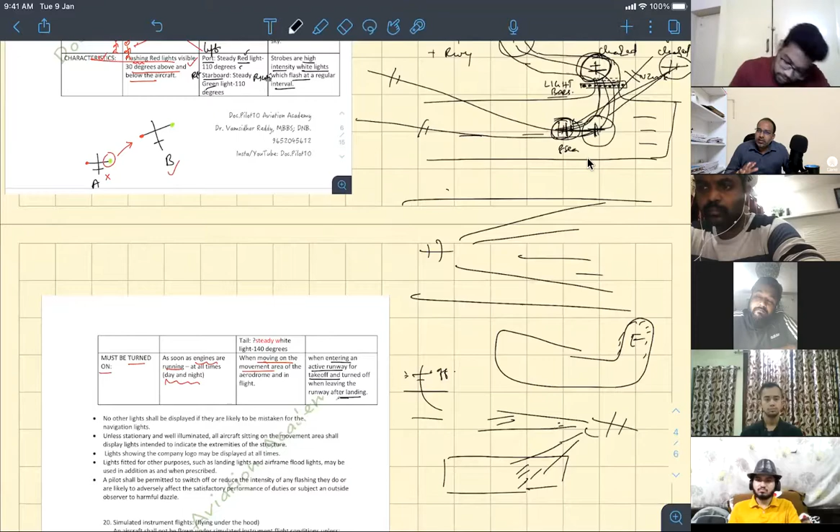All the lights are clear. So no other lights likely to be mistaken for navigation lights should be turned on. You just read these lines, you will understand. Not many questions are there from there.

One doubt - can you give the description of anti-collision lights? Like for navigation it's steady, and for strobe it's high intensity flashing white light. For anti-collision lights, it's flashing red light that is visible 30 degrees above and below the aircraft.

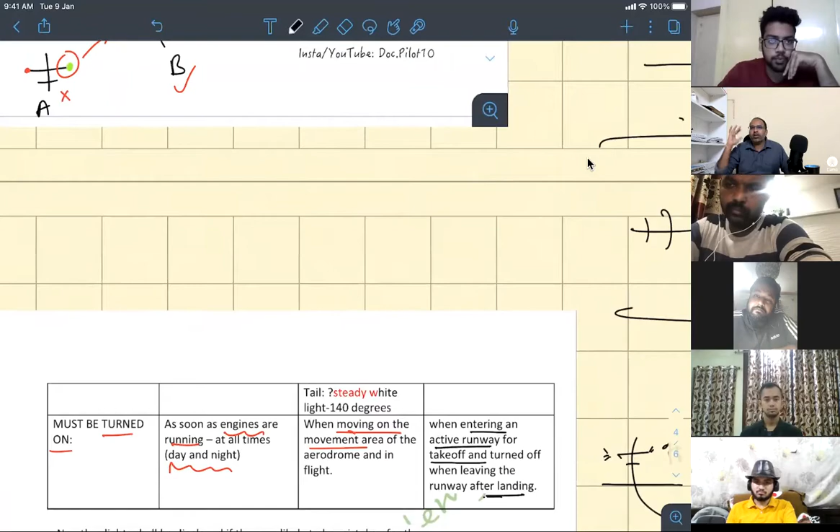Last two rules, then we will complete general rules.

Azhar, did you do your instrument flying?

Yes, sir, I do. You did not. See, what happens when you're doing instrument flying is... Azhar, I'll put you on mute.

You will be flying something called under the hood. That means there will be a hood so that you cannot see outside, but you can see all the instruments. And there will be a pilot in command or your instructor monitoring you. No instrument flight or flying under the hood can be solo. When you are getting your instrument rating, you cannot do it solo to get the rating.

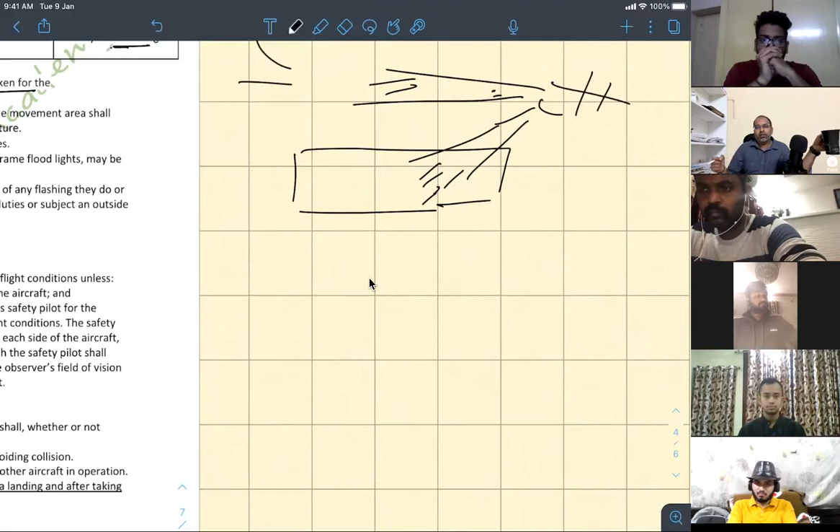That's why instrument flying is always dual. That's why they say you have to do instrument flying and save some dual hours - meaning go solo more - so that at the end your hours will tally.

So always, if you are flying under the hood or doing simulated instrument flying, there should be a qualified pilot in the control seat who can observe the entire area. Both you and he should have fully individual controls - you should have your DGI, he should have his DGI; you should have your rate of turn indicator, he should have his rate of turn indicator. So it should be dual controls, fully functioning.

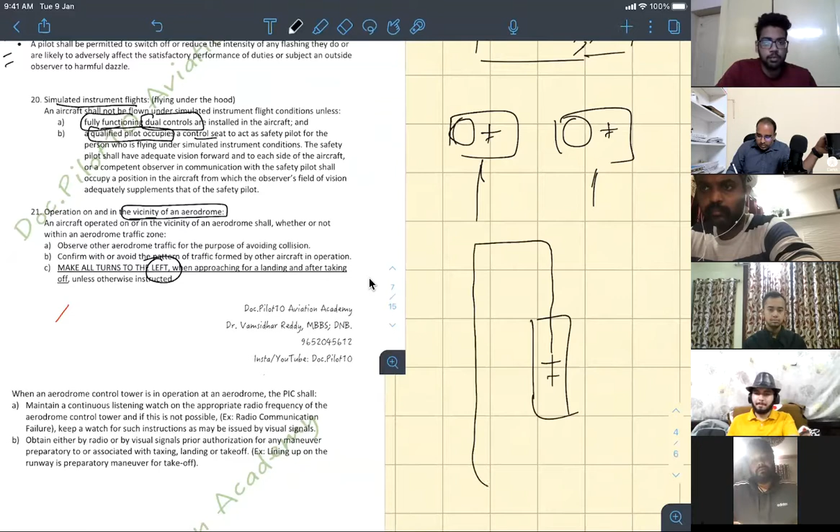Last rule: when you are operating in the vicinity of the aerodrome, make all turns to the left - not like when you are on a collision course, where you turn to the right. This means if you are flying a traffic pattern - also called circuits - all your turns will be to the left: left turn, left turn, left turn, left turn, come and land. So when flying in an aerodrome, most turns will be to the left.

When you do instrument approaches, most procedures may also ask you to turn to the left, unless otherwise instructed.

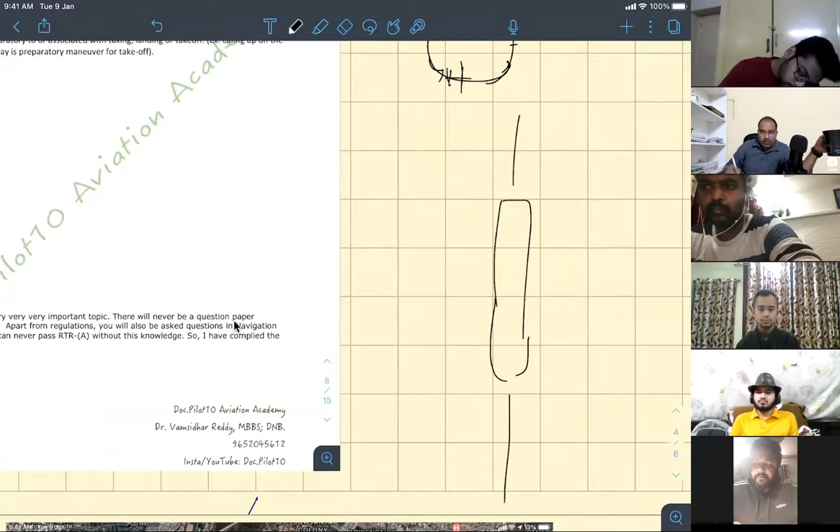For example, take Begumpet Airport - it's very close to my house. Yesterday we saw a screenshot of this. This is how the Begumpet sector is - it's a bit big. I'm just drawing so you'll have an idea.

So this is 5 nautical miles, let's say. Here it is military area, Air Force - you cannot go in this direction. For example, if you are using runway 09/27 for taking off, you cannot do a left hand circuit pattern. So when winds favor this runway, you will be instructed to do a right hand pattern just because you don't have rights to enter the Air Force area - it's prohibited, meaning they say don't come.

So in those rare cases, you do right turns. Otherwise, all traffic patterns in your flying life will be towards the left. This completes the general rules.

Now, next class we will do flight plan. This next class is super important. Flight plan is something you will do before every flight in your flying school, and also later as a pilot. If you are working in a chartered flight, you will be responsible for filing your own flight plan. If you are flying for Indigo or a major airline, they will have a dispatcher who makes it for you.

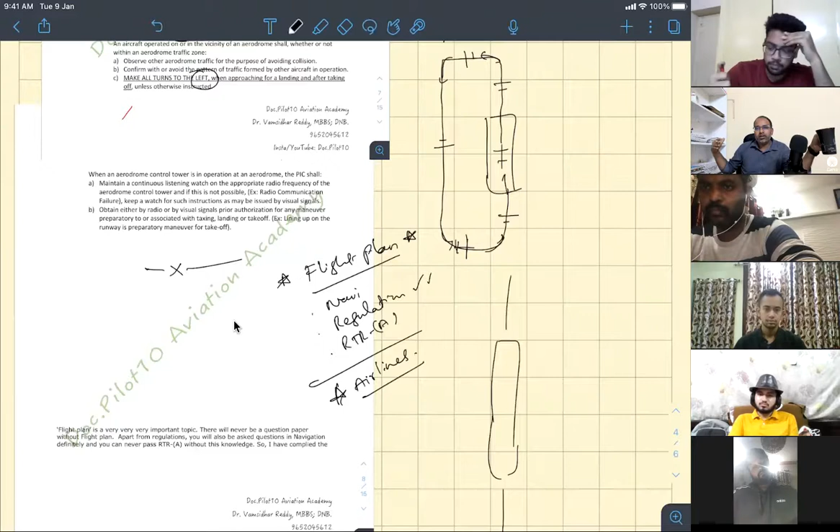So what I'll do is not cover just one sentence or paragraph on flight plan in regulations - I'll spend one entire day covering everything you'll learn in navigation and in RTR related to it, all in one class on flight plan. So next class will be on flight plan, then we'll cover VFR rules one day and IFR rules the same day, and then we'll end the topic.

Slowly I'll finish rules of air - it's a big topic, so I'll go at this pace. New students, I do not guarantee that I'll complete regulations in 1 or 2 months - I'll take it at my own pace.